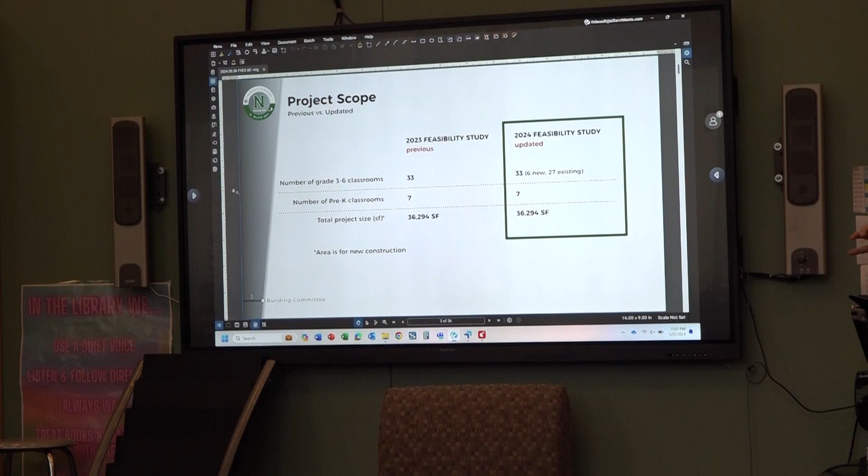So 33 total classrooms, 6 new, 27 existing, 7 pre-K classrooms, and try to get as close to 36,000 square feet as possible, however it worked out based upon the modular unit. We're stuck within that building block, so it's going to be somewhere in that range - not going to hit that number exactly, and you'll see what that ultimately ended up working out to be.

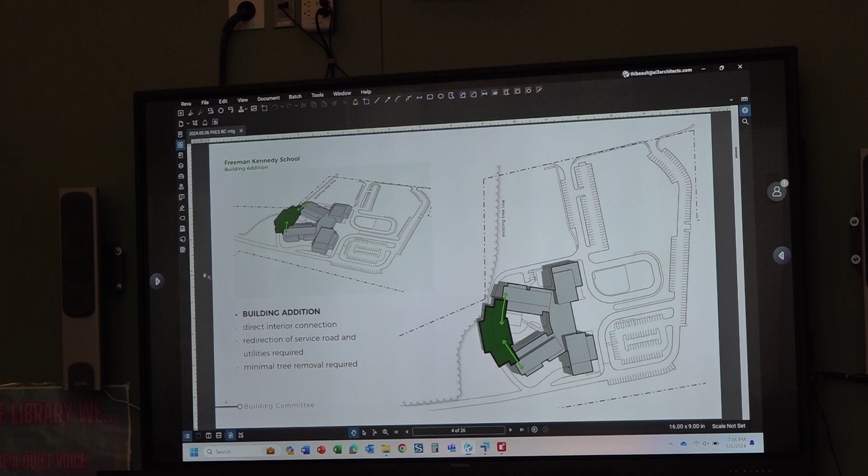So the study, the brick and mortar option - the previous feasibility study - looking in-depth at that conversation. Refresher: direct interior connection. This is an actual stick-built building connected physically to the wings right over there, basically bridging the gap, making the courtyard enclosed. Because it is a permanent build from foundations all the way up through, and the type of construction, it can be physically attached to this existing building.

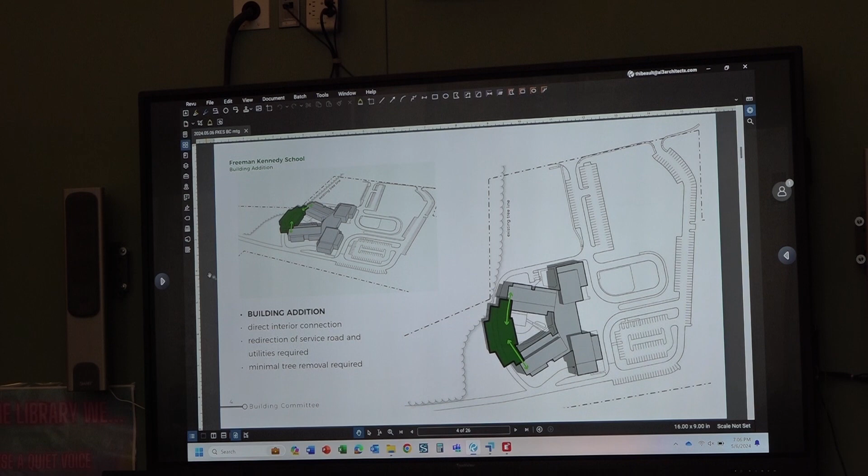It would require redirection of the service road and the utilities underneath that road. It's landing right on top of where that road is, and that was all captured in the study completed last year. And because it is within that service road and utility area, minimal tree removal is required since it's already cleared back there because of the road and the utilities.

So starting the conversation in fall of 2022, we piggybacked on top of the previous work that had been done back in 2019, as well as previously for the visioning and the programming, to really define what this project should be, needs to be.

So there were 4 specific visioning and information gathering sessions. It was to reconfirm a lot of the work that was previously done. The 4 sessions were broken out into early childhood (your pre-K component), art/technology/STEAM integration, general education and teacher planning, and then special education.

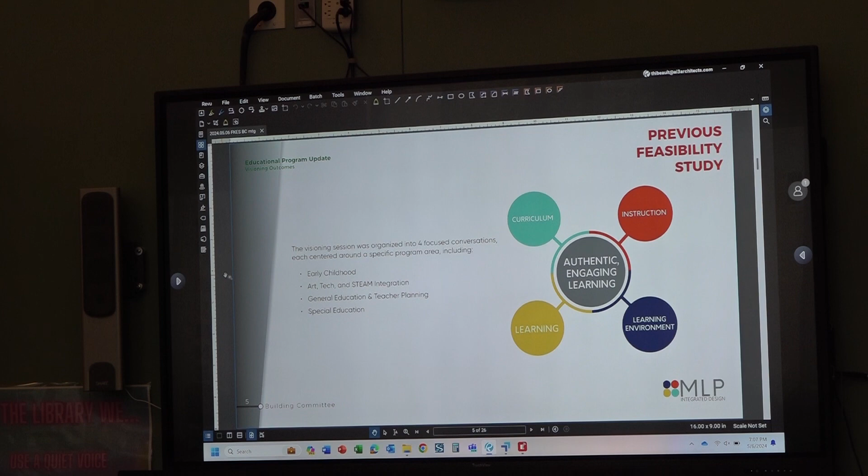We had in-depth conversations with the faculty and staff for each of these groups to talk about what was previously done, to see if it still fits the needs of the district, and the vision of the future. What was done in 2019 was a high-level overview, not thorough or in-depth. These conversations were a couple hours each, with tons of discussion and diagrams, and we came back with additional information.

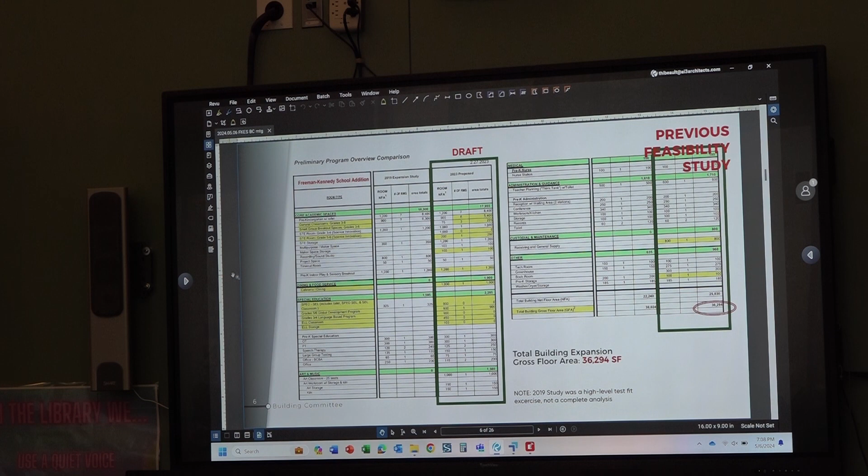Through this process and these focused conversations, we started to identify the scope and size of the project. What you see on the screen is a space summary, generated by the MSBA, the Massachusetts School Building Authority. Even though this project isn't utilizing MSBA funds, we as designers still use this tool because it's a spreadsheet inventory of all the spaces, listing the name, size, and quantity of each space. You plug it in, apply a grossing factor, and it calculates your total building size.

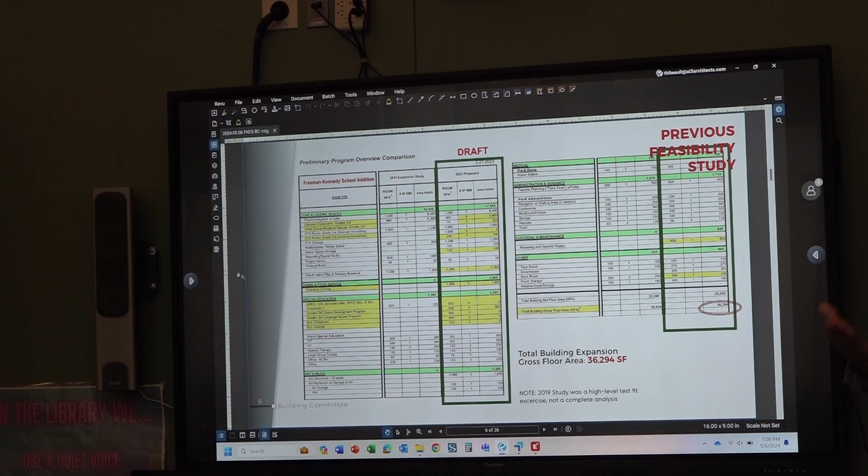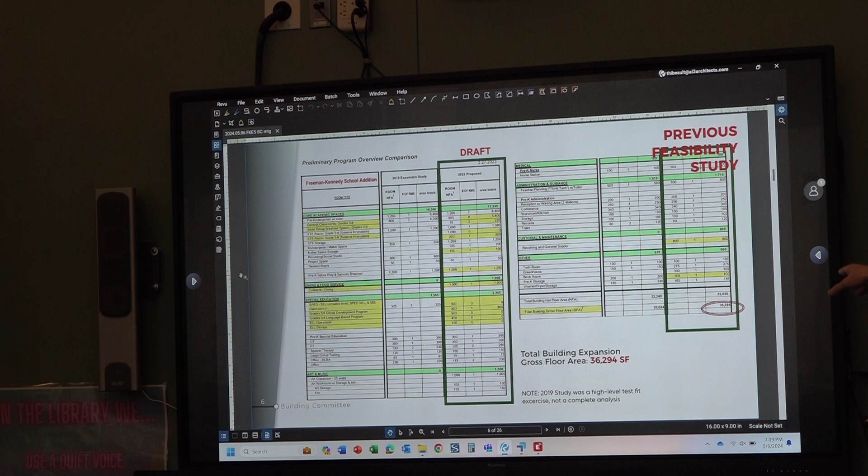What's on the screen and in the packet on the left is the 2019 expansion study. A space summary was done in 2019 to identify the approximately 30,000 square foot building project that was submitted to the MSBA multiple times. What's highlighted in green on the right is the updated version, with some modifications and revisions based on those focused visioning sessions. Ultimately, we landed on a project just over 36,000 square feet - that's where the 36,294 number came from.

Now, one thing to note is that this isn't the first round of the space summary. When we initially did this, we were at 41,000 or 42,000 square feet, significantly higher. Follow-up conversations with the district helped identify efficiencies and overcorrections, and really pin down the actual size needed, so it reduced down to approximately 36,000.

Justin, can I add some context for the group? When you're referencing 2019, we actually started with a joint space study committee with the town back in 2017. At that time, there was significant concern about all the Chapter 40B developments coming in and the pace at which the town was growing. That original space study committee looked at multiple options, including a Freeman expansion, since the building was designed with expansion in mind.

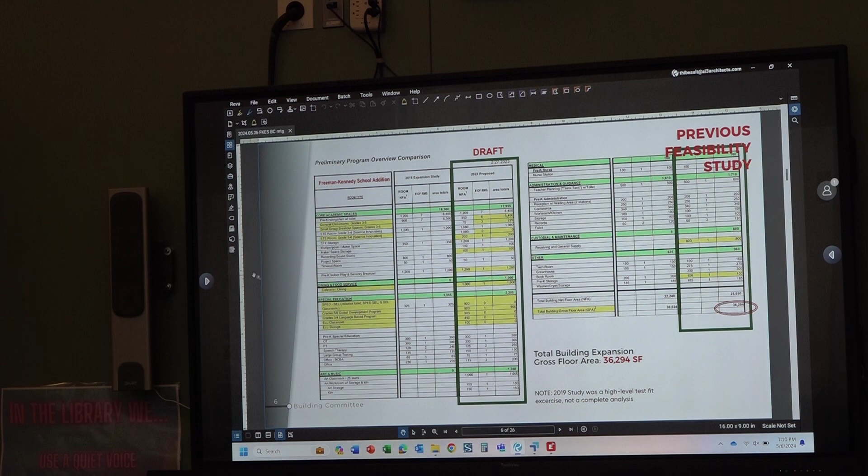We looked at the possibility of expanding at H. Olive Day and what that would entail, and then we looked at the possibility of a third site for an early childhood center. Based on all the data at the time, it was decided the expansion was probably the most cost effective. So we went to town meeting, I believe in the fall of 2019, and they funded a high-level conceptual study just to see if we could physically fit enough classrooms in that addition to make it a viable option for further study.

So when Justin talks about 2019, that was only a high-level look - square footage, system capacity. If you move the preschool, you need a nurse, OT, PT, so what spaces would you need and could we fit them? It wasn't the big study that AL3 did - it was only about $10,000 for that big picture design piece. Very good points of clarification, and along the way, please feel free to stop me and ask questions. We've been through this multiple times, but we can expand on any of it.

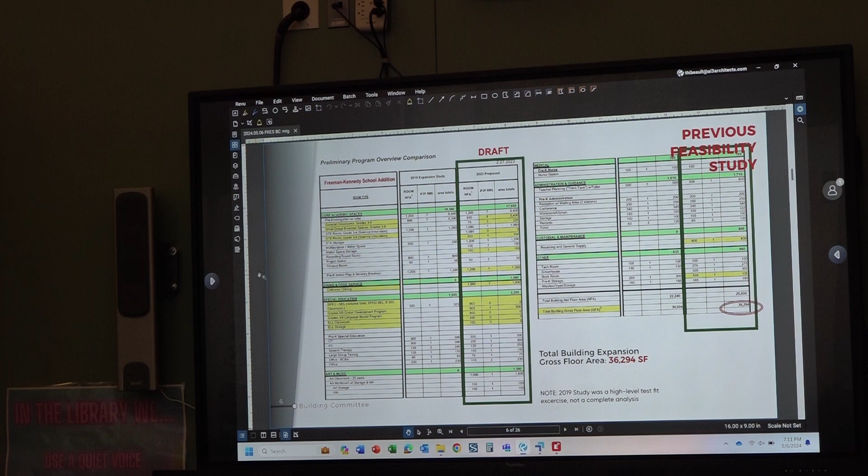I noticed the addition of 1,000 square feet for dining. Would that be a separate dining facility for this new addition, or would it involve moving the existing cafeteria? Yes, as part of the study with increased enrollment, we were asked to look at what happens when you bring in that many more kids - can the existing facility fit it?

Initially, we had targeted 1,000 square feet to accommodate that additional growth. Based on configurations and further analysis, it can actually be accomplished by just reconfiguring the number of tables and the layout within the space. So that's a component that could possibly drop off, because as currently configured, it's landlocked - it would be a significant undertaking to move the kitchen or district administration for what could be accomplished by additional tables and reconfiguring.

Makes sense. We did look at that though, because we're going from class sizes of 128 kids having lunch to 170 kids we have to seat. So ideally you'd make the cafeteria space bigger, but cost was prohibitive, so we looked at other ways to address it.

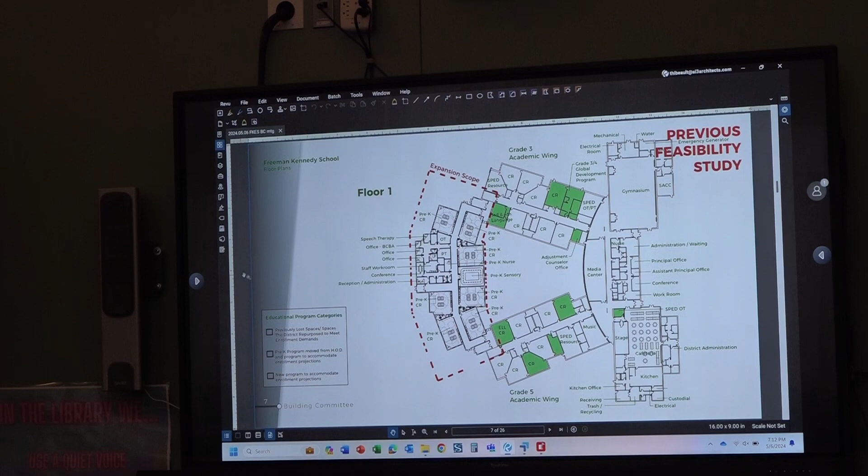So what does that 36,000 square feet actually include? What's up on the screen is a floor plan of the first floor. Before we hop into the actual expansion scope flagged on the left, I just wanted to mention the items in green on the right.

The green items are existing spaces within the current school that will be reallocated for who utilizes those. So minimal work, maybe a little ceiling work, floor repair, paint, but nothing like a holistic project. It's minor renovation, just to reconfigure based upon the new occupants or program of that type. Some of that's, for example, the science lab that we've now made a classroom. Ideally, we turn that into a permanent classroom and move the science lab to a different area.

Those are just opportunities we have to reorganize so that it's better efficient and better flow. This was looking at more of a holistic approach based upon student needs, student services, really locating support spaces central within the building. We're not locating a space that is utilized by the entire student population at the end of a third grade wing, or whatever it may be. So it's actually really apparent on the second floor.

You'll see when I flip up there. But this was an allocation and almost a global study of where can spaces be located with minimal renovation, reconfiguration to make it work best now that there is some capacity issues addressed with that expansion project. So that's what the green is.

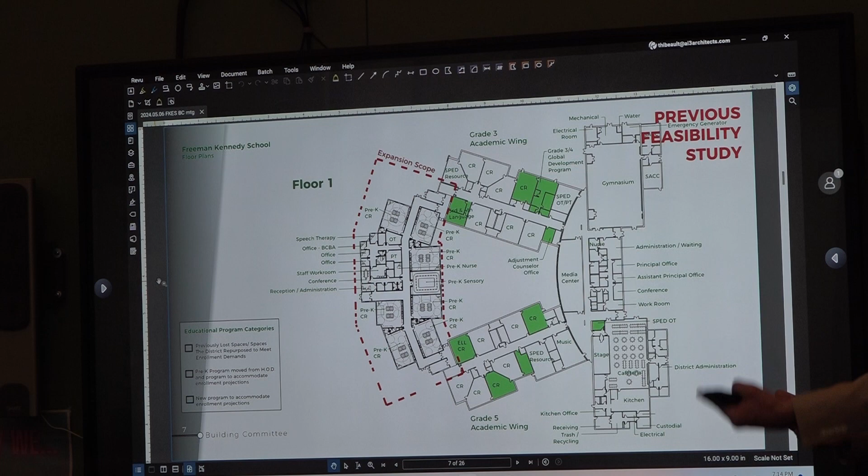Within the expansion scope, first floor is the pre-K component. So it's all of the pre-K classrooms, the pre-K sensory space, the associated toilets with all the pre-K rooms. It's also the special education administration component. As mentioned, the special education is going to move over from HOD to here and really be the front office, as you will, for the pre-K component. So that includes that entire staff, OT, PT, and the pre-K nurse. All of that program is located right here.

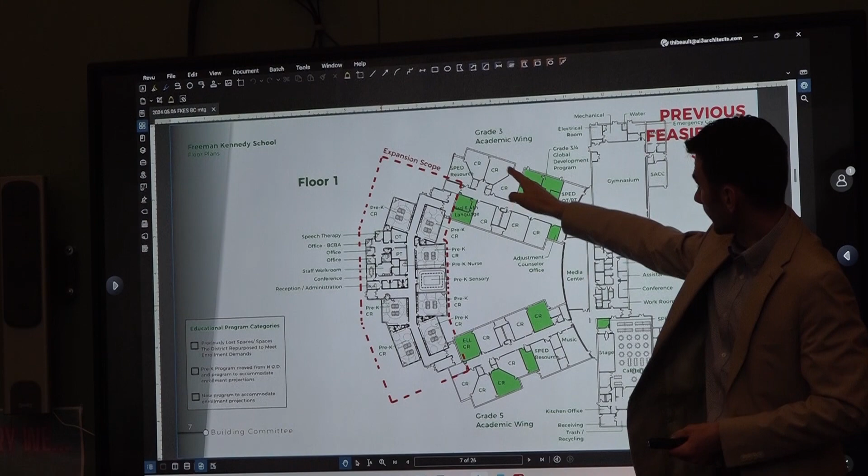That is the main entry to the pre-K component. Directly adjacent, and then around it are the classrooms and the sensory space. Connection to the 3-4 wing, the 5-6 wing down here, adjacent to the stair towers, the existing stair towers with doors that can close off and lock, still allow access internally, but that would be controlled with key cards, etc. Always allowing free access from a code perspective in an emergency, but still separating the youngest students with the 3 through 5 or 3 through 6.

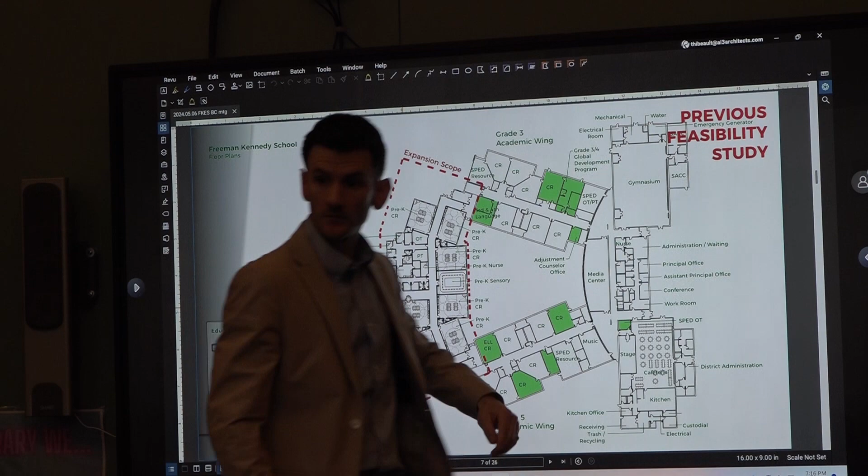Sorry if I missed it, so the main entry for that would be in the back there? Main entry is right here to the pre-K component. We designed that too so that the preschool traffic won't interfere with the bus flow traffic from the rest of the building. There's a separate entranceway and a separate road that comes and exits out the back of the building.

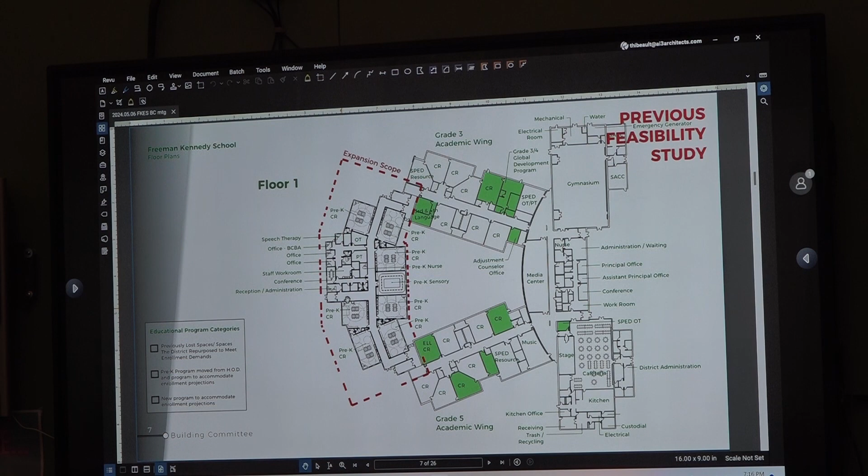That proposal will replace the existing access road back there? Yeah, you have to move the access road over. Shifted? Just shifting it over a little bit so that it's not over the electric, back towards the woods. You'll see on the site plan, it adds actually 43 parking spots back there with a little bit of a drop-off loop dedicated to the pre-K component. That way, they're on that side of the site in totality. Arrival, dismissal, all of that stuff, preschool play, everything is over there. Their main entrance is over there. They don't need to use the front of the building over here.

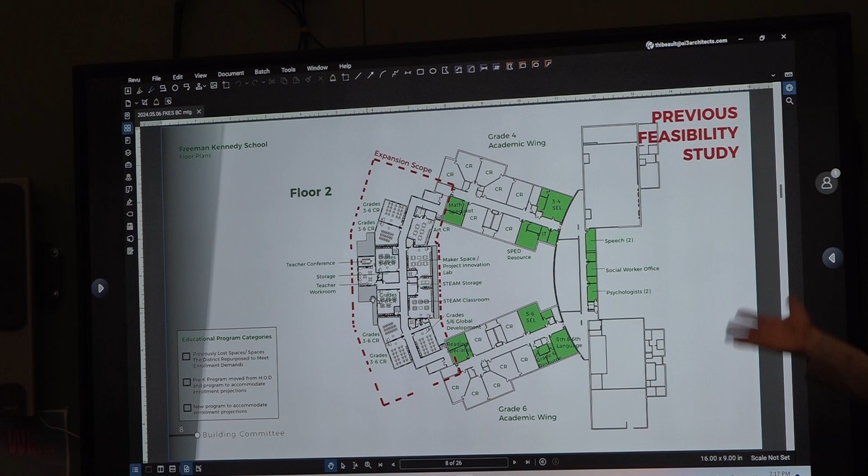As far as the expansion scope, this is where your 3 through 6 components live. So your classrooms for grades 3 through 6, I'm just going to sit on this side. Classrooms are over here. This is also where the teacher workroom and conference area is right now. It's actually the speech office, which is vastly undersized. It's tiny.

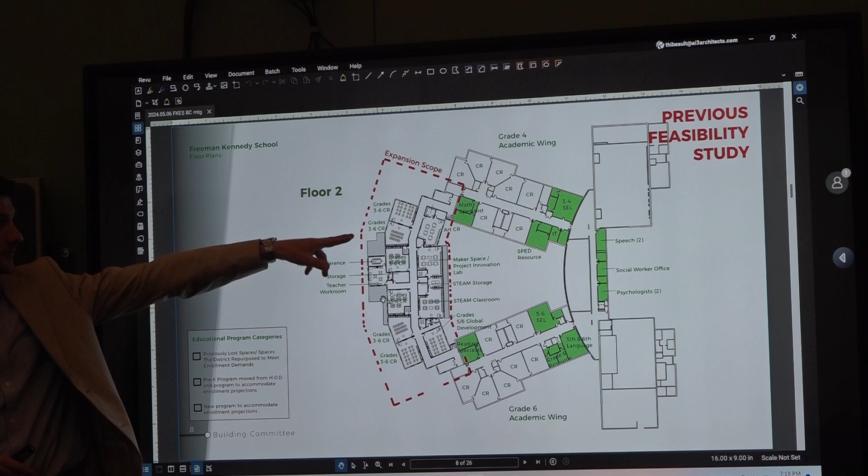So locating the conference room over here, as well as the STEAM classroom, which is that science lab that's essentially going to be replicated over the expansion. The art classroom—the current art classroom is inadequate in ventilation for the kiln, as well as location. It's within the 3-4 wings, so by locating it in the center zone here, it brings it more central. It also creates a nice connection between the STEAM classroom, the art classroom, and the makerspace within that as a tech center.

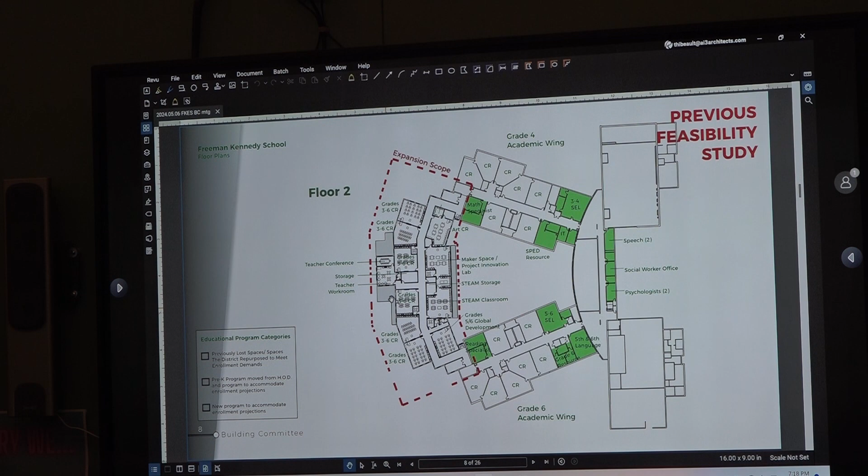It's a room where, if teachers have classes at specials and they have prep work to do, it's where the copiers are and all of the teacher planning materials. Right now we have the teacher planning room in the speech office, so we'd be moving the speech people there and moving the teacher prep room to the wing—think laminators, copiers, printers, all of the materials they use. At the school I went to, I guess obviously bigger, it was all just in the administrative office. Yeah, we don't—we have the teacher prep room, which is where they do all of the materials preparation for the day during specials.

And then the conference room is just like a boardroom type room? It's a prep room, it's one space. They can use it for prep, or if they have a teacher meeting, parent meetings, or small group meetings within that one space, one office space. So it's a multi-purpose room, really. Okay.

Yeah, so that makes up the second floor. That is the 36,000 square feet. That 36,000 also includes grossing factors—things like your stairs, your hallways, your toilets, the wall thickness, all of the stuff that is required just to make the building physical. So, 36,000 square feet from a 30,000-foot overview.

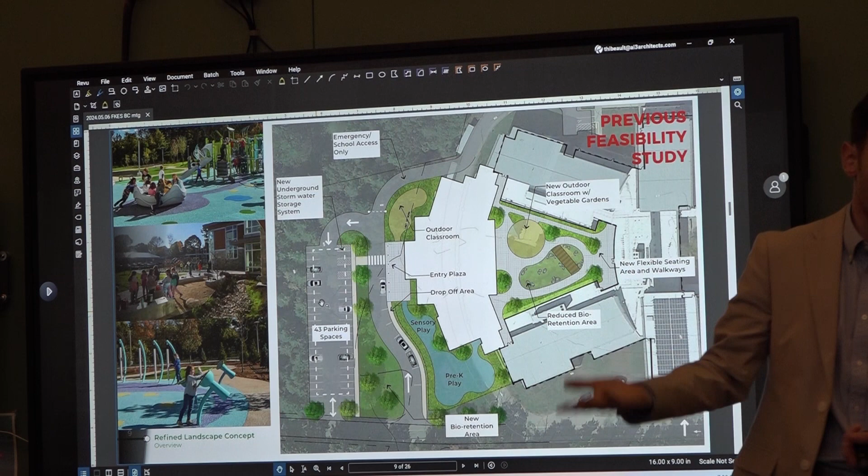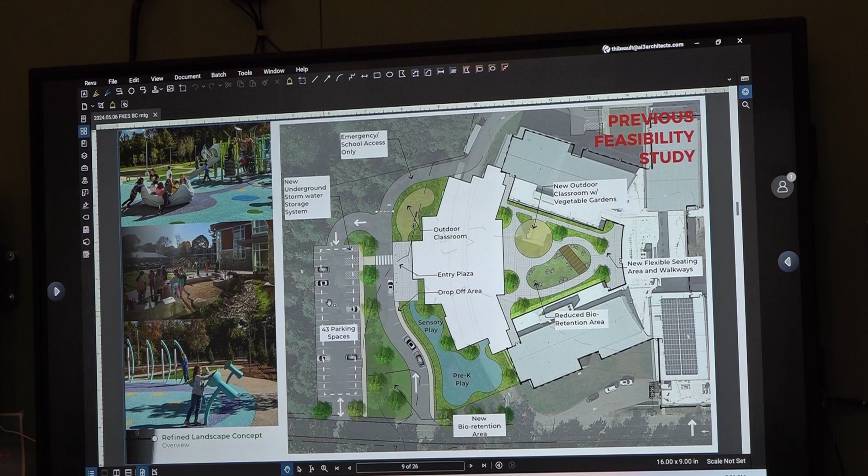It does enclose the courtyard, but there are provisions for safe egress in the event of emergency, and there would be some reconfiguring within the courtyard to provide an outdoor classroom configuration, as well as to modify the current stormwater system. There's stormwater retention within the current courtyard, and also a lot of retention system underground where the building would be. So that is part of the project—to redo that for all the bio-retention areas you can see down here. There'd be one proposed over here to replicate what is lost by the new footprint of the building.

So that is the building itself. Before hopping into the projected cost of this version—we'll go high level because it's approximately a year old—is there any questions on what was being included?

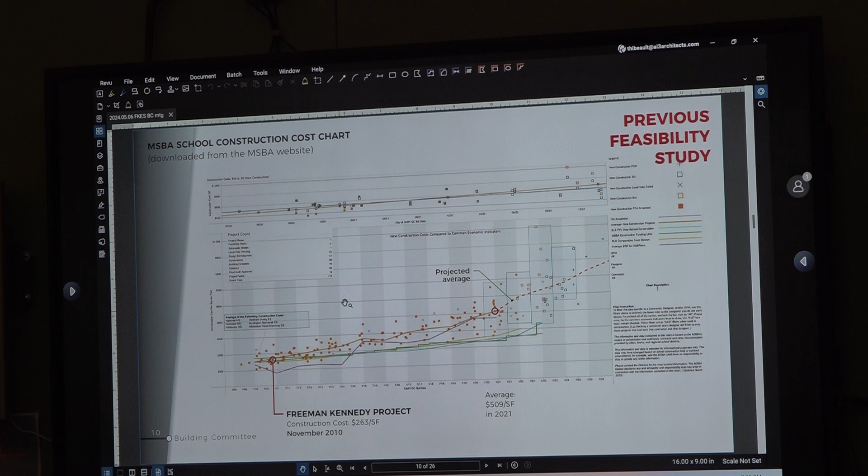I think just to reemphasize, the square footage space adds 6 classrooms for Freeman, and it adds 7 preschool classrooms plus the office space. What you see, that science area—that's moving the art room over, moving the science room over, which gives us additional classrooms in the wing. So the total adds the 6 classrooms for Freeman, 7 preschool, plus the repurposed science and art room.

And that frees up space at Olive Day—well, we need more than preschool. It gives us back some other classrooms located in the wing by moving the art room, so really you're adding 8 classrooms because the art and the STEAM room are in the wing, but we're reclaiming that space. So it adds a net number of classrooms here, re-adds spaces that were previously used up, and frees up at the sister school, for the preschool program. Yes, right.

It moves, it empties out 5 core classrooms that are preschool classrooms, plus the special education office and multiple offices. So that's how this was originally designed as a solution that increased capacity of both buildings. The space allows us to reclaim a lot of space that was previously added and lost, without having to build another gym or add to the cafeteria. That was the whole thing, it just made more sense at this school versus a whole rework at H.

Part of this is just reiterating for the folks at home. We did look at adding, as I said, back in 2017, and we looked at it again with Flansburgh, who did the 2019 study, as well as AI3 - the idea of adding to H. Olive Day. The problem with doing an addition at H. Olive Day is the building's 35 years old. It was significantly more expensive to bring the building up to code if we added onto it there, and the life expectancy of an average school is 50 years, so we'd be investing a lot in renovation, plus it's built to the footprint of the land.

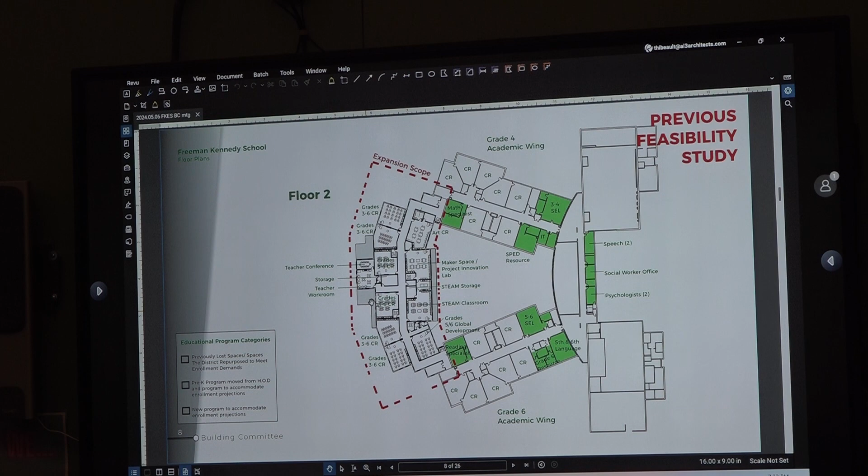If we're reiterating things for the people watching this at home - I've had folks ask me, there's all that space behind H. Olive Day, why can't you go back? That's conservation land, so it is statutorily prohibited. Versus here, the original footprint allows for this development.

So looking at it from a cost perspective, what's up on the screen is a graph from the MSBA. We know it's not an MSBA project, but the MSBA does a very good job tracking construction costs in the K-12 market - that's all they do, that's all they fund. They watch that constantly through multiple phases of the project, and they have historical data all the way back to '03, '04, back when they started the program. This data is also a year old, so keep that in mind as we go through it, but all the data up to here is still accurate.

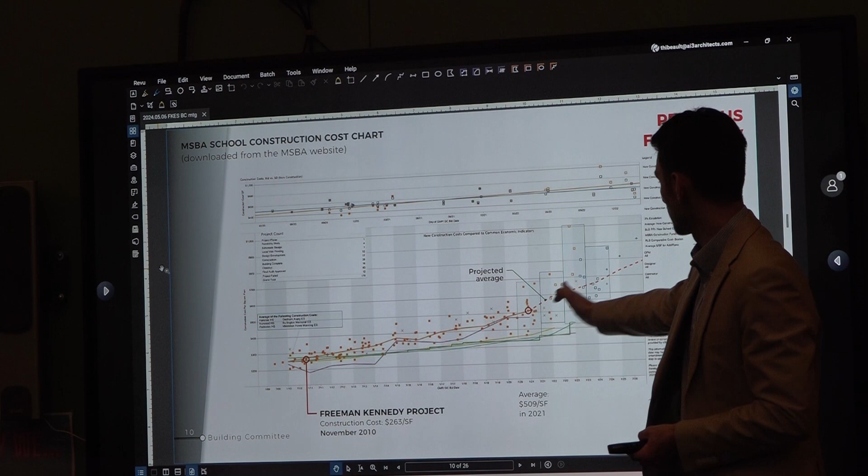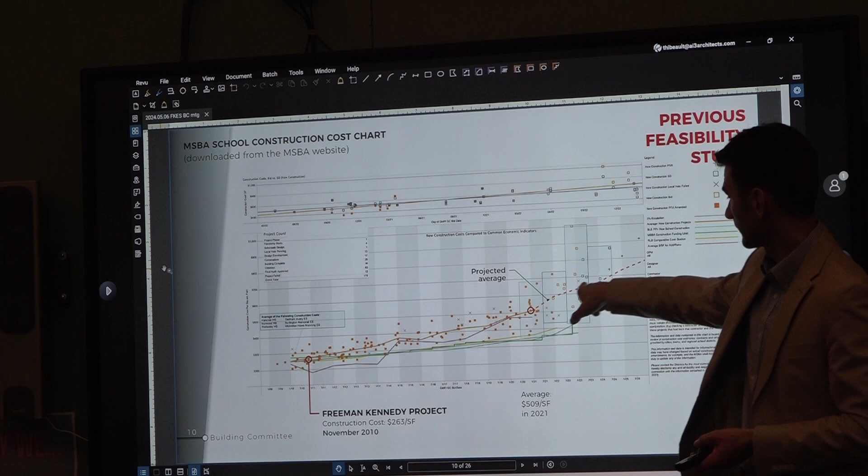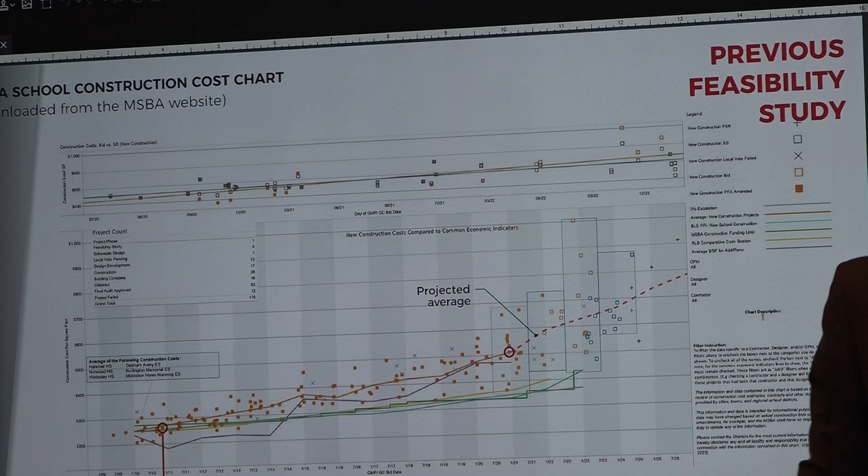So the Freeman Kennedy project back in 2010 - just to give everybody a sense of scale of where you were 14 years ago - construction cost average for Freeman Kennedy was $263 a square foot. I know it's hard to believe that's what it was in 2010. Moving forward, the MSBA identifies the average cost - the dashed orange line is what we're projecting the average is, because those projects aren't in closeout yet. So in 2021, the average construction cost is $509 a square foot. Over 10 years, it basically doubles.

We're going to come back to this shortly to see where the project fits in, but that's really setting the table, and you can see the boxes are all trending up.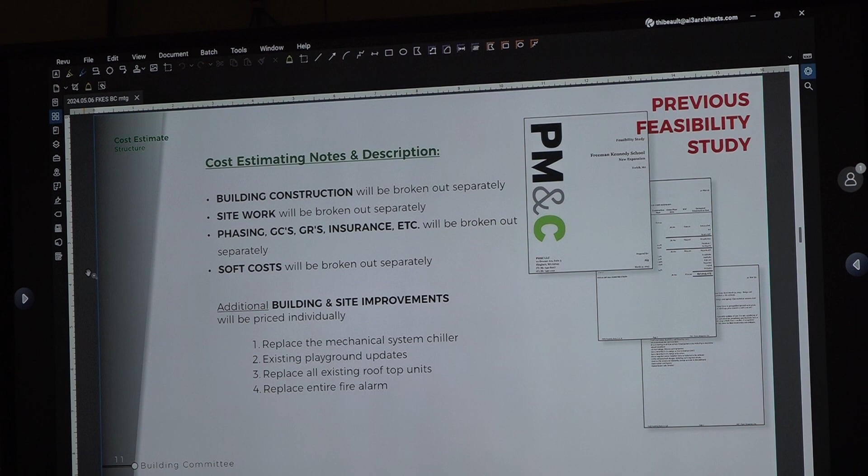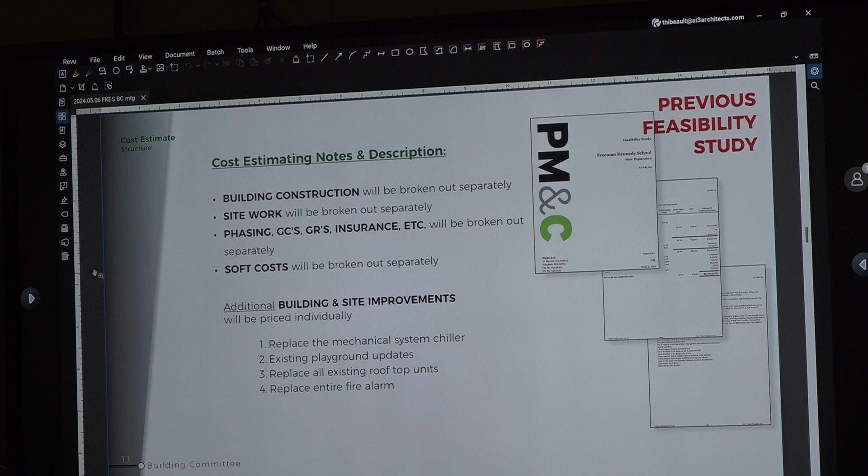During the feasibility study last year, we had a professional cost estimator, very familiar with the K-12 market and public bid, go through and provide a cost estimate based upon the floor plans, the site plan, and the narratives for the project you just saw. It's broken down into a handful of elements: the building construction as a separate line item for cost, site work so you can identify how expensive the site is, phasing, general conditions, general requirements, insurance, etc. - these are the bucket of monies required just to build the project, plus everybody's fees.

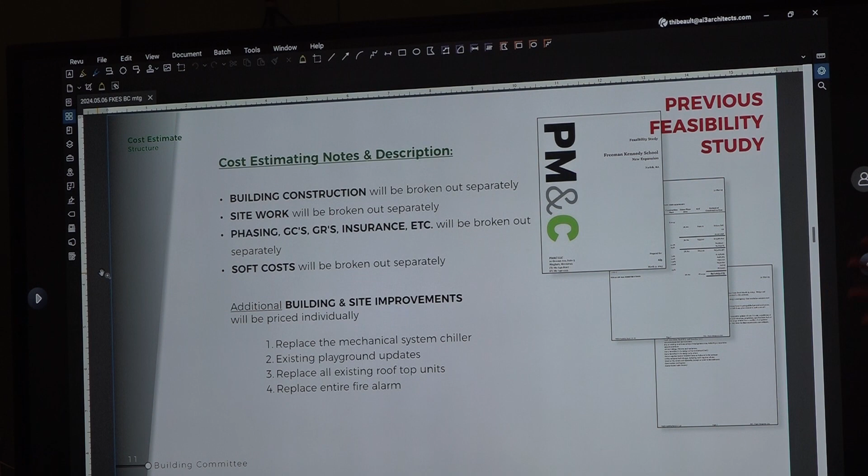Additionally there are soft costs - that's technology, that's FF&E, that's engineering fees from the architectural and entire design team, that's OPM fees. Your project is big enough that you will need an OPM as it progresses. All these items are broken out as a line item just to give everybody a sense of where everything is landing. Additionally, there were 4 items identified for building and site improvements.

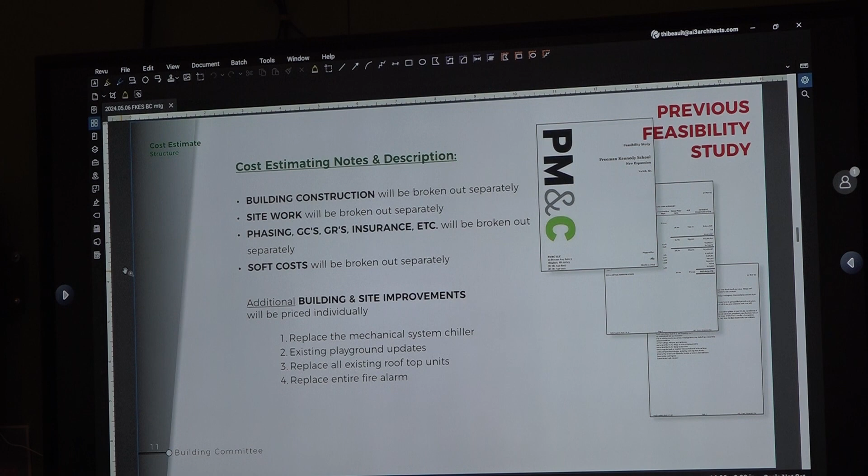That's based upon your existing building and current configuration - if you're going to go to the town for money, make it worth it, instead of going back and borrowing again if additional capital repairs are needed for this building. So number 1 is replacing the mechanical system chiller, located over the gymnasium - there have been comments and concerns with it previously. Number 2...

It's at the end of life expectancy too. Yes, it will need to be replaced, coming up on 15 years.

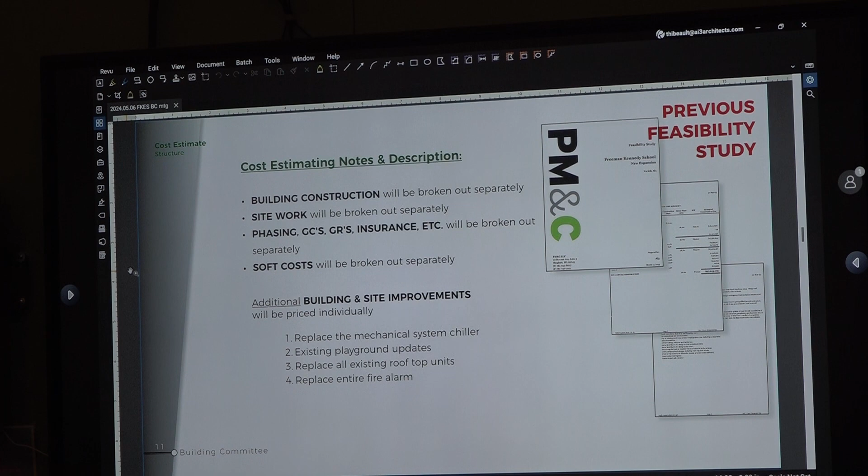Exactly. Number 2, existing playground update. So that is repouring the soft poured-in-place surface, fixing the fencing, fixing some accessibility items as well, updates to the playground.

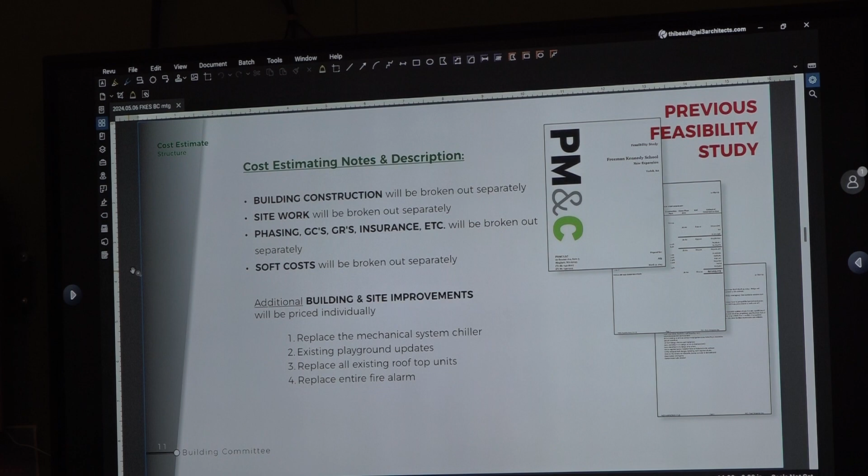Number 3, replace all the existing rooftop units. If you're doing the chiller, the rest are all at their end of useful life. You're going to start replacing units here and there. What is it going to cost? Again, this is to provide a cost for doing all the units on the roof in one shot.

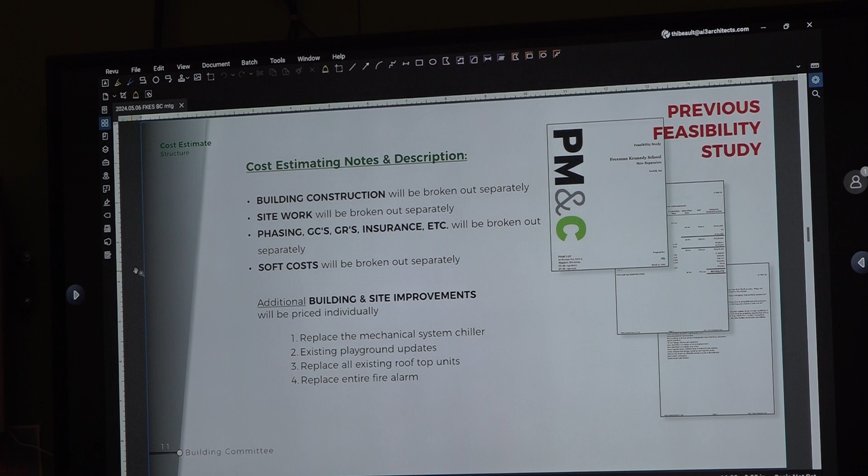And number 4 is replace the entire fire alarm system, within the existing building, to update it and align it with whatever is provided in the new expansion project. Is that at end of life too, or just? It's not at end of life, but I believe it's a proprietary system, so it's very expensive to service and get parts, and you're locked into a specific vendor.

So it would be replaced with a more open source type system? Yes. We've had a lot of trouble getting people out to fix or repair or getting parts, because it's proprietary, so only one vendor is able to work on it. Matt can speak more to this, I know more than I should, but not as much as Matt would. Matt's predecessor had the same position, I believe, about the fire system.

Plus, if we're adding on, it makes sense to have the two systems aligned together. I'm just more concerned that the previous system sounds like it was a bit of a dud. Does it work if there's a fire? Yeah, it works, but sometimes it works even if there's not a fire.

We had a smoke alarm giving us trouble the other day, and the tech came out, looked at it, and called me and said, look, they're going to tell you we don't make these heads anymore, so you'll have to replace all the heads in this building. He said, you're better off going on eBay or looking somewhere else to find these heads. So we ended up doing that, but most of those detector heads are $400 to $600 a piece. That sounds suboptimal.

Again, it's a proprietary system, so you're stuck paying it. So one question: between the two projects, if we go either stick-built or modular, are these items still going to be addressed? In other words, were these four items optional? The town could decide to just do the project and handle these as later capital items. If you do modular, or a different solution, these are still end of life. They'll have to be done, whether the town votes to do them as individual capital items later, but they're all end of life.

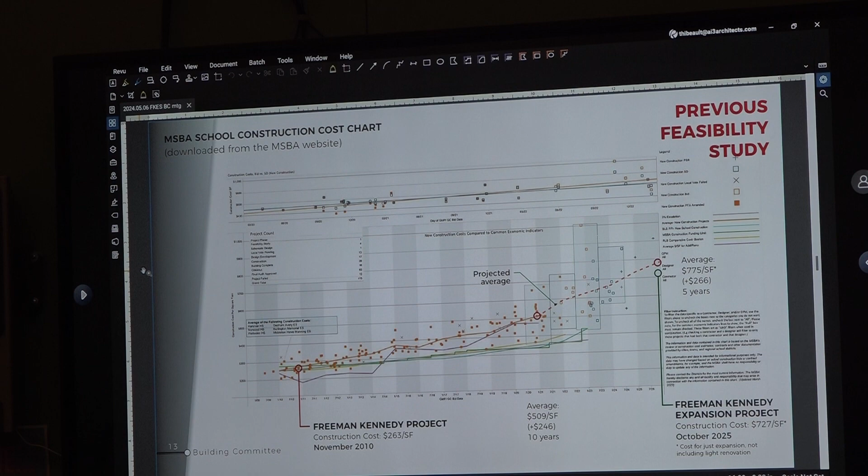So again, still lower than the projected average, and it'll be interesting, since this was a year ago, to see. We're going to send these out to get re-estimated and see where that 39.2 lands, and we'll report that alongside a comparison to the actual mod study, apples to apples, because that number will go up, absolutely. It's just a matter of how much, and where it lands in comparison.

And then the last one was the project timeline. If it moved forward previously, it was going to be town meeting, town election, 2023-2024, fall, November, December, January of 2023-24.

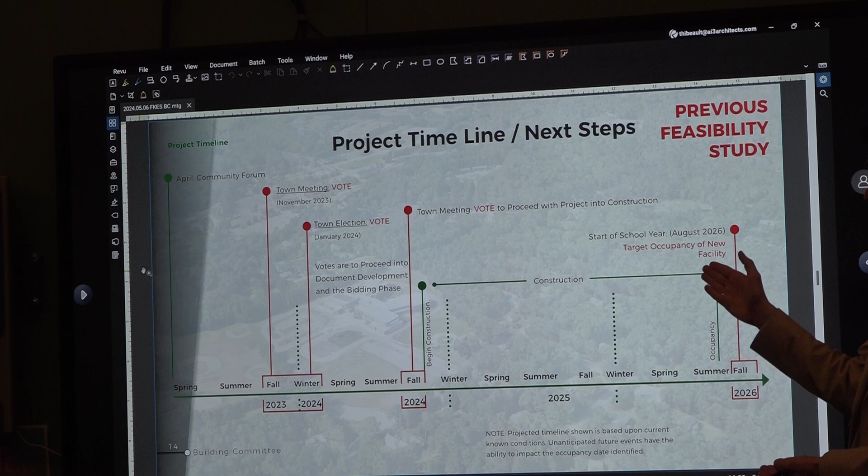Then it was going to go through documentation for approximately a year and bidding. It was targeted to go back to town meeting in fall of 2024 with bids in hand, saying this is the actual cost of the project, here are the bids for the actual work, and then proceed to the vote and begin construction.

A 2-year construction window, so occupancy would target fall of 2026 — September 1st, whatever that first day of school is. But again, this is a year old, and all of this is going to shift at least one year based on timelines. So occupancy would be fall of 2027 as we stand right now, if everything moves as originally laid out.

So that's the overview of the previous work. I'm going to pause there to see if there are any additional thoughts.

The full feasibility study, if anybody wants it, is online on our webpage. It's 150 pages or so, and it has the traffic studies, all the septic engineering, and all the rest of that.

So I printed these large because what we're going to go through next are the layouts of the mods, and the print is small, so I figured it would make it a little easier.

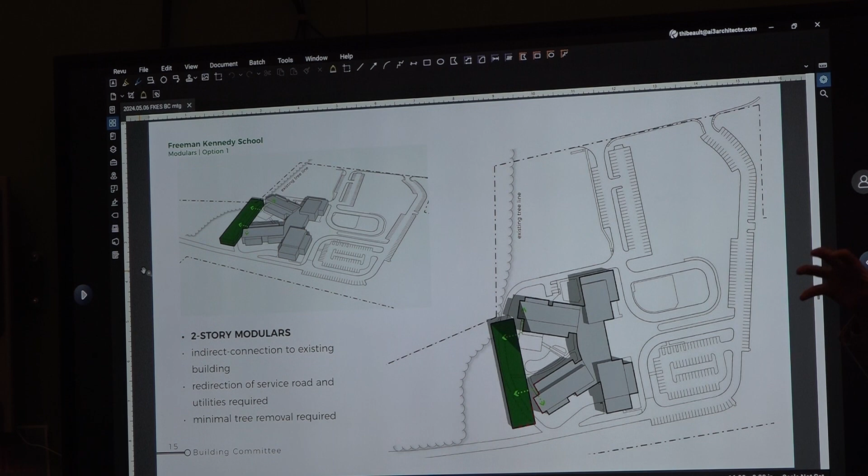So, option 1, 2, and 3. Option 1 is what we'll call the apples-to-apples option — same location, just a little bit of separation, but on the existing access road, over the existing utilities, and close to the building, though indirectly connected since we can't physically connect. This involves redirection of the service road and utilities, with minimal tree removal, basically the same spot as the previous version, minimizing disturbance of the trees.

This is the most efficient footprint for the mods — a single straight line. The modular unit is 14 by 66 or 14 by 39, and based on those dimensions, that's where everything goes up.

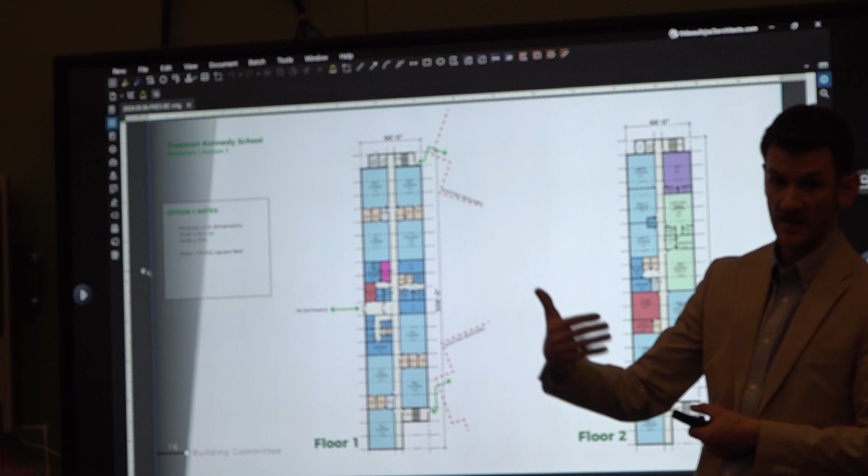Some of the high-level components remain the same configuration: first floor on the left, second floor on the right. The first floor has all your pre-K classrooms, the pre-K sensory space, the special education administration suite, OT, PT, and the pre-K nurse. It's all the same programmatic elements, just straightened out into a narrow bar because of the modular configuration. Again, every classroom in pre-K will still have a dedicated toilet, but you can see the efficiency and where everything lands.

Same concept — the pre-K entrance is still centrally located towards the back, so the site plan configuration is very similar to what we have. The connection points would be one at each end from the actual Freeman Kennedy side, with students going outside, accessing the stair towers on the end, and then circulating up to the appropriate classrooms.

Second floor is the elementary. Can I just ask, are those stairs interior, enclosed? Yes, interior stairs — so the path of travel would be flat on the sidewalk, straight.

Second floor, same configuration — all the classrooms, the teacher planning space, the steam room, the art room, the maker space. It's all the same programmatic elements, just straightened out and separated from the building.

Looking at this, as I mentioned, there are limitations based upon modular sizes. How close to that 36,294 square feet can you get? Right now, this configuration is 35,642, so it's about 500 square feet off. It's pretty close, comparable based upon the amenities. Spaces are slightly above and below, but they're pretty close.

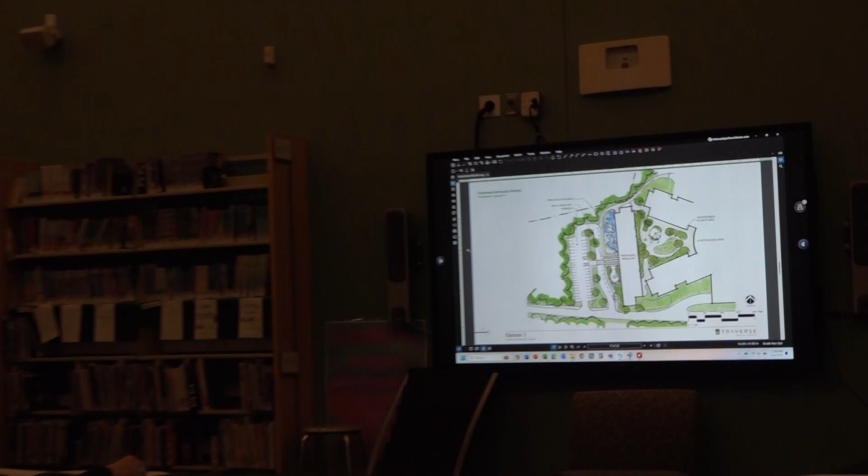Now, if we went with a modular solution that is not connected, we may have to rethink - do we move the art room? Because now everybody in the building has to go to the modulars. We might have to, but we need the same number of spaces, so for estimating purposes it's probably fine. But we might have to rethink whether we want the science room that everybody accesses to be in the modulars - we'd have to really rethink that a little bit.

No, we'd have to reorganize what actually lands. But I think when we went through the process before, we had talked about having project spaces and extra rooms. We cut everything out, we only put in the classrooms. So we need all of these spaces - what actually lands, we might have to play around with.

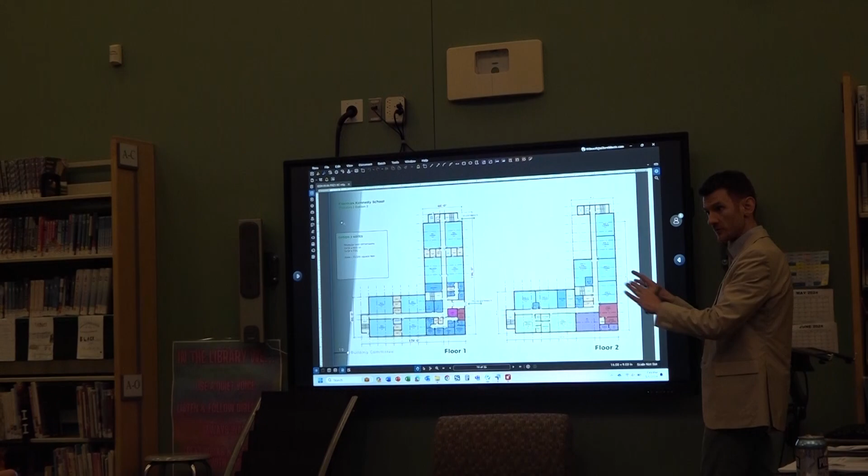Site plan of option 1 talked about. So option 2, this is the 2-story mods, and this is actually taking them and pushing them further back towards the woods, again trying to avoid that perimeter access road and all the underground utilities that are right where the previous options were planned. So looking at this configuration, we're tucking it into the woods. You'll see on the site plan here in a moment, but it's really in an L configuration. Again, first floor is pre-K, second floor is the elementary school. All of those same components and rooms are separated, first floor, second floor, same configuration.

What we've done is that central control point - special education, OT/PT needs, etc. - is in the knuckle, from a visibility and control standpoint, and then we have two wings off that. And then up to the second floor, that knuckle is teacher planning and some support spaces, and classrooms stem off of that in each direction. The stairs are located at each end, as well as one in the center for easy access up and down, but also to provide the code required stairs for this space because it is long.

And then this obviously requires the kids to cross that access road. Yep, right? Absolutely. Yeah, so this one is 35,509 square feet approximately. So it's what, 700 less?

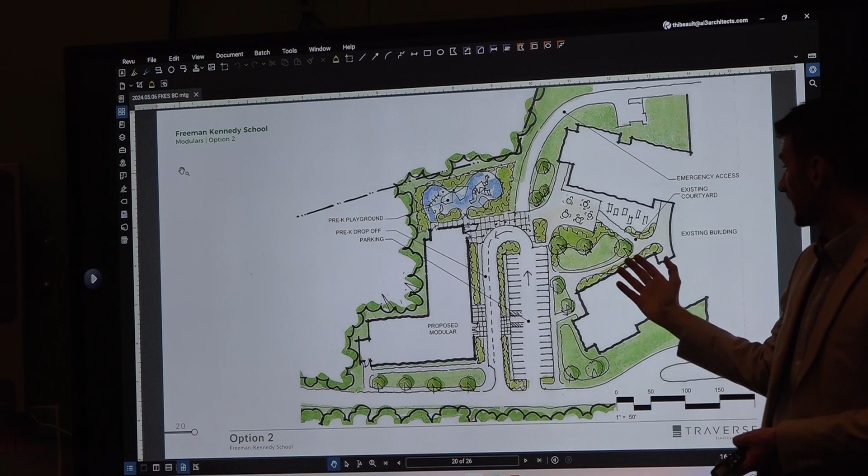And this is what the site plan would be. Again, we took that same drive loop and parking, and that is now where the access road currently is. The building is further back. We're maintaining the perimeter here, but more for emergency access, so that can be gated off just to avoid having parents drive through the parking, because in reality, this hardscape plaza is where the elementary students are going to be, what they're going to be using to circulate to the modular units. And we don't want them crossing this component here, so that's what that's for - we would block off this road so there's no through traffic.

And again, same configuration of parking, it would drop off to the pre-K component. Playground is located at the northern side, and then there would be some work within the courtyard. So a lot of similar configuration, or same amenities, just different configuration based upon where the footprint is located.

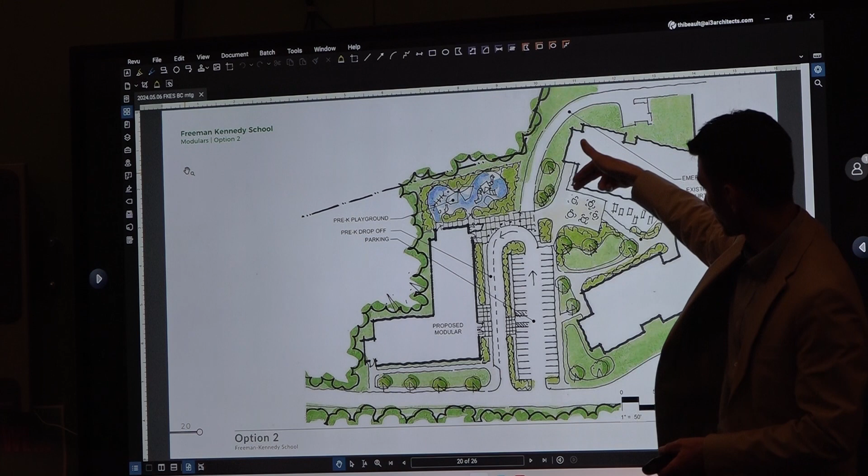So that crossed off area would be walkway where people would access from the building wings, over into the modular. Exactly. And that would not be a covered walkway because of the distance - that would just be outside, back and forth to lunch, library, gym. Yep, that would be the back and forth for students and staff, the older kids.

We touched on this a little bit, and maybe it's a question for after the third one's presented, but have we quantified what the loss is of class time, the additional or reduction needed in staff? Are we gaining any efficiencies by having one plan over the other? Because to go from A to B in the first plan versus A to B in the third plan, there's a difference there. We did not quantify that and couldn't even begin to, but you're probably correct, the first one would be closer. I think what we need to do is look at all three and get pricing, and if this is way off the charts, then it's not worth spending the time on that.

When we budget within the school day 5 minutes of transition time, a class going to gym and back will add to that, and they do go to lunch and one special daily, so it will decrease the amount of learning time. As we talked about last time, for special education, math, reading, or other kinds of services, kids will be traveling further. But before we get into the details and look at the traffic flow, we want to figure out if these are viable or cost efficient.

Then we'll have to take the next step for this committee to weigh the pros and cons of each option. And just to piggyback on that, as an FYI, the length of the school day is dictated by the teacher's contract, so we can't just say we'll add 5 minutes every school day and have that be a thing.

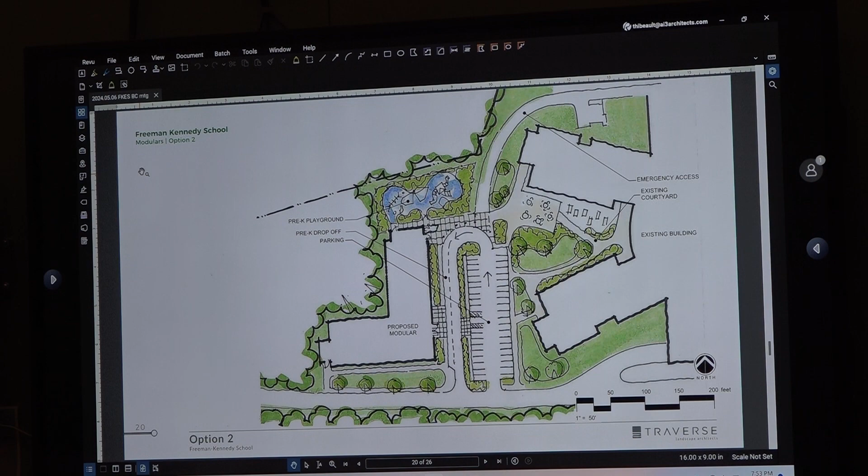I would think if this is the one that's closer or similar in price, this would be the best solution.

Option 3 is the single-story modular. This is located on the field area right out front here. It's the largest footprint because it's taking that same area and just putting it on one level. Far access, as you can see. We would have to look at utility connections further if this was a viable option, because it's outboard of where a lot of the utilities currently service the building.

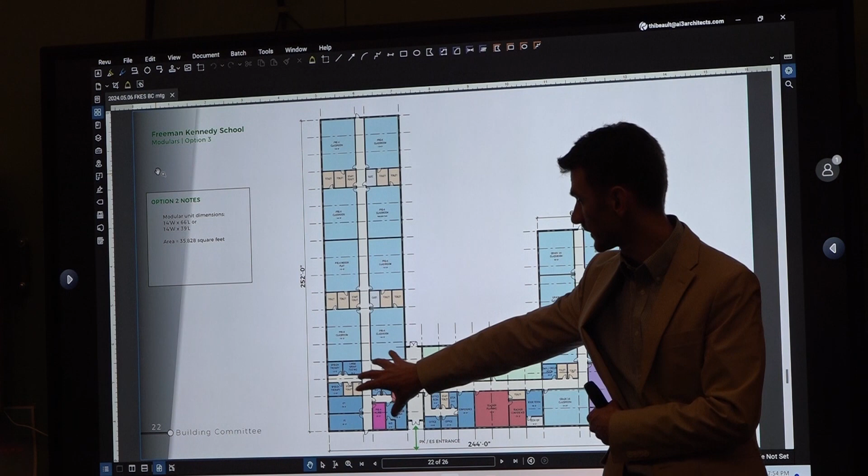From a floor plan perspective, it's similar-ish to the previous L version. What we've done is located the control—special education, nurse, etc.—in this knuckle. The pre-K component runs vertical on the left, and this becomes your elementary school component here. Classrooms are over on the end, and what we currently have are more of the support spaces, teacher training, etc., in the middle, again for more control within the building.

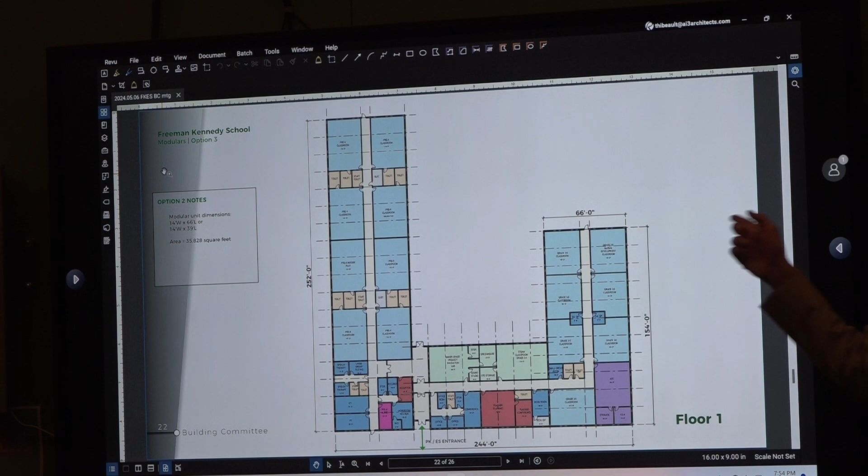It also locates the entrance as close as we can towards the existing gymnasium corner. From a site plan perspective, we're keeping a lot of the same configuration here. Existing parking remains here and here. We're adding in a drive aisle here for drop-off, and this would become your pickup and drop-off for pre-K. We do have some questions regarding timing because this is also near the bus loop and how that all works.

Based on our traffic analysis and study, we could capture the 43 identified spots for that pre-K component in your existing parking. It was identified during traffic counts that over here on the left is always full. This large bank of parking right here is approximately 50% full during the day, and all the way on the right, that whole loop, even down to here, is only 10% utilized throughout the regular day. So there absolutely is efficiency that could be gained with it being up there, just from a parking perspective. Granted, there are other cons—it's a large footprint, it uses green space, etc.—but from the parking standpoint, there is that little bit of offset.

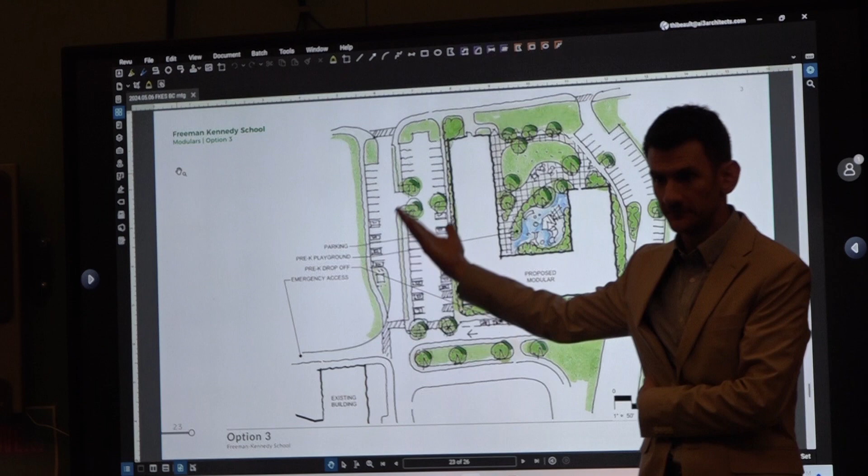Just as a reference, if we locate this here, this takes away the play field that's used for recesses currently. And so the students that have to transition between the buildings would be coming out and walking up this new access road and then coming up that way, hitting the corner of the building. So out by the gym, and then staff coming in doors, and then just up to the field.

One of the issues is where do you access the existing building? You don't want to come into the gym, so it could be like that after-school area, but then you're still going through the gym, or you come all the way down across the front of the gym and in that other main entrance on this side of it. So there are some concerns, or thoughts that need to take place, about what door they actually use, which could possibly extend the travel distance.

So getting to the point of the recess area, would there have to be an additional space created to replace that? I don't know where we would create another one—I think we would lose the field. The kids during the day, the rec fields we sometimes use, it's a longer walk, and whether we could work out something—I know they're not going to want us on the softball fields they just redid, but could we use some of those field areas?

It's a challenge because they're further away, and recess is only 15 minutes. If you spend 5 minutes walking out to the field, you lose time. Most likely we would, and they don't use it a lot when it's heavy snow, but it would limit play options if we located it there.

That's the play area on your way out to the softball fields, the smaller one. Yes, if you're right in front of the building, there's that big field behind the parking area, and the kids do use that. Some kids go play in the playground, and other people go to the Gaga pit, and then past that. Whatever it's called, the Gaga pit, and the pit thing. Yep, the Gaga pit.

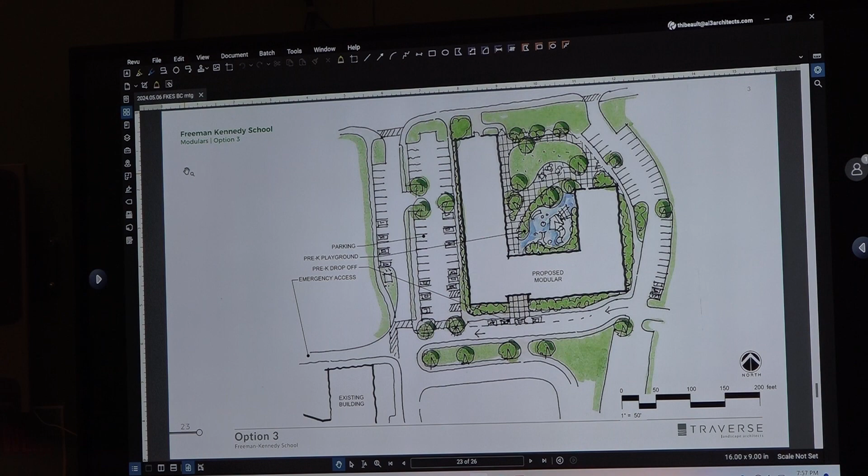So you chose these 3 locations because of the amount of square footage we need, the size of the building, and based on all of the available land on the Freeman Kennedy site. Right, those were the only 3 options that would accommodate it. Yes, those are the 3 options, because if we located it on the parking lot, well, one of them is your leach field for your septic, so we don't want to put it there. If you want to locate it on the other ones, we could work to fit it in, but then you have to replicate that elsewhere. So our take was, don't disturb what you have that you will ultimately need, if possible, and locate the modulars where it makes sense, trying to avoid some of those items.

That's why it's apples to apples. That's why it's pushing it back, to avoid some of those known conditions with your utilities and your stormwater, and that's why it's the field up front.

I think the big thing, as Vicki mentioned, is in all 3 of these designs, it gives you the square footage we need and the number of classrooms. We would need to really rethink educational programming, and I don't see us locating the makerspace, the art room, and teacher planning in the modular, just because it wouldn't make any sense. We would have to pick a grade level, like grade 6, move other classrooms and other spaces and reorganize, like we did in the last feasibility, figuring out what we'd reorganize within the building to accommodate. But I don't think that matters for pricing necessarily.

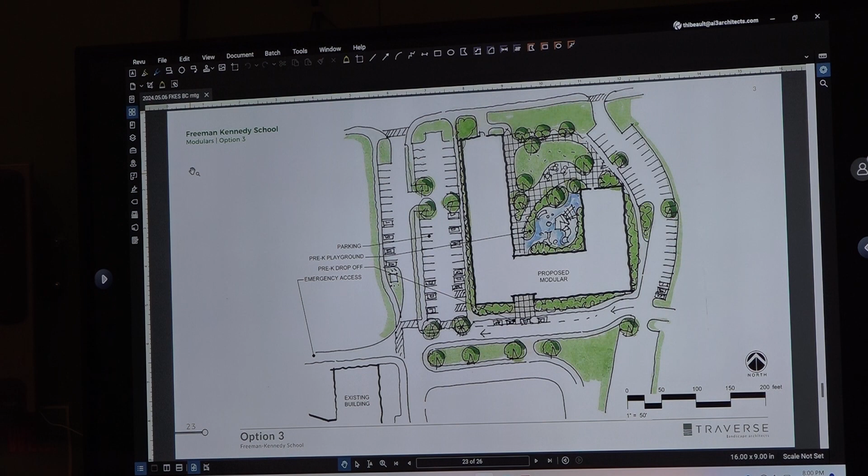But if you move that, if you said, okay kids, your classroom is now here, what would it take to make that into a science lab again? Right, we could put that back, and then we'd have to look at the art room. You said the art room currently is not sufficient, it has ventilation issues with the venting of the kiln.

We could do some moderate work. Let's go back and talk about this. So makerspace, STEAM classroom, and the art room, we could take those 3 spaces and make them traditional classrooms. Those spaces would then have to land within this existing building. I'm thinking that would make more sense, just because then we would put the science lab back, the art room back, the STEAM room back, because I just don't think moving one grade level back and forth for planning would make sense.

24 teachers are here, but everybody's going to walk to the modular for planning? They won't do it. And does every grade use the makerspace? Are third graders using it too? How does that work? They kind of do use that.

And for the makerspace, I imagine it's like one of those little 3D printer things? Engineering, computer, and design lab. Okay, and they use it for AV, green screen, robotics, science - all of that happens there.

And that goes back to the volume, right? Where do you want the optional space? Do you want to put that in an 8.5-foot space, or do you want to put it back into the modular, bring it back into the traditional space?

So with that, for instance, the science lab - we're not going to change the footprint of that. It is what it is. The walls are there. We will just reinstall the amenities to turn it back into a science lab.

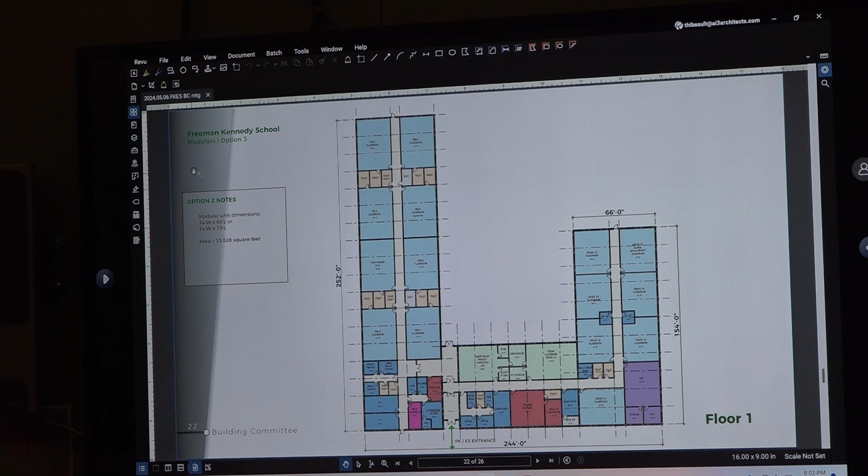But you have the other self-sustaining classrooms, and then the second floor was the classrooms in the maker, in the built-in addition. But one thing that I don't think you mentioned, Justin, in the brick and mortar feasibility design - the pre-K, there is no access into the pre-K classrooms from the building.

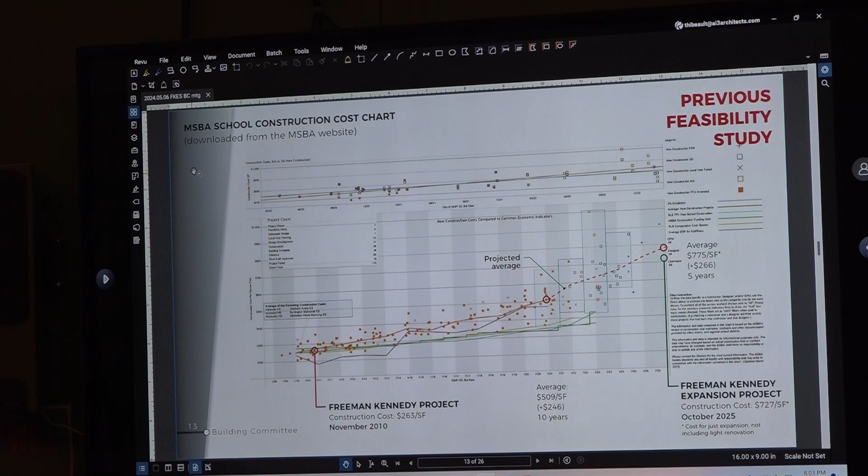So 4th, 5th grade can't go into the preschool hall. The doors are locked with key codes, but the upstairs is connected, so your class could walk through to get to the science lab - it's circular flow, it's a circular building. Yeah, so first floor, you can see a door here - that's controlled access, to avoid any 4th grader from walking into pre-K.

Is that the same for the modular? Second floor, there's no door there. It's free access because it's all the same - it's all the elementary school students.

Modular - and the way it would really lay out is the library is the center here, the makerspace will be the center of the back. But there's no connection, so they would have to go to the first floor, and then it sounded like there was going to be some kind of key card - open the doors, let the kids go, close the doors.

So now here, what we would do, Vicki, is you'd take the makerspace, the art, and the science room back out, and make that all 6th grade - you'd have 9 classrooms. But the 6th graders could go into the preschool, they would have access.

Could we lock it - could we put a door in so the 6th grade couldn't access it? We could put the door - that way at least they'd have access traveling into the stair towers to go up, and then we could key card it so they couldn't go into the first floor main component. So it'd be a similar situation, but they're circulating up.

We would probably put two additional classrooms and a special education classroom there that serves the 6th grade, and then bring those other spaces back into the building. So you would have - I'm not sure if it's 6th grade - but one grade level in a special ed classroom, and then those other places would come back in. That way, at least you'd only have one flow of traffic - the kids would be coming into the building, but we wouldn't be sending teachers and other kids back out.

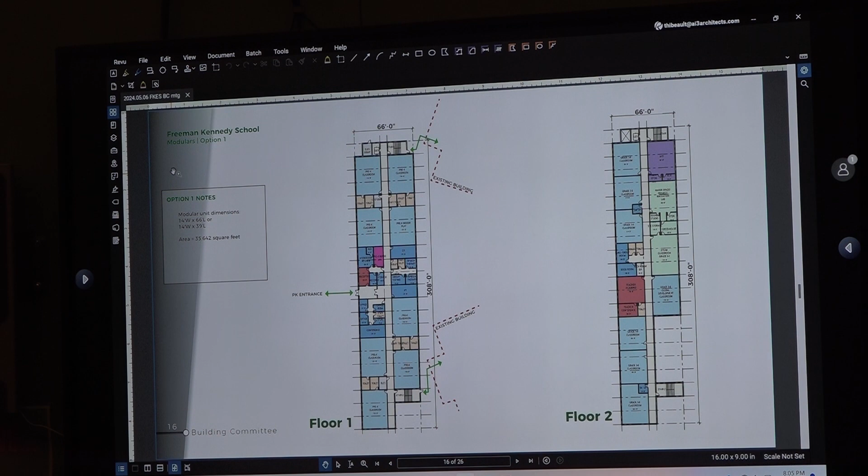And a lot of times teachers' classes come in and they're like, oh, I have to make more copies, I have to print this out. You want them to have easy access.

Hold on everybody, I'll be right back. Let me get my boots on. Golf cart. Yeah, okay.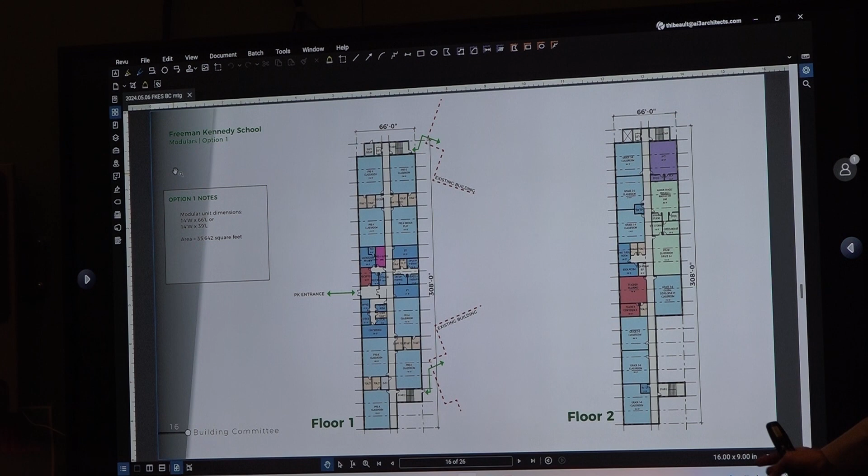So what we can do is go through and update based upon that. Now, it's totally up to this group here. Do you want to meet in two weeks to take a look at them prior to sending it to estimating, or do you want us to make the updates and send it out to estimating? It's totally up to you guys, either way, depending on your comfort level.

Since we're not trying to rush for a town meeting target, I'd kind of like to look at it one more time. I would like to look at it again as well. Grace and Justin can too. I mean, would these be major material cost changes? It sounds like just a modification, a slight design change.

So honestly, a lot of this is the price per square foot. For modular construction, they're going to look at how many modular units there are, how many we're making a middle wall versus a side wall. They're going to look at bathroom counts, the general configuration for mechanical and plumbing systems, runs of piping and stuff. But the material conversation is really at a high level, it's not getting into the nitty gritty.

What does that mean? Like whether it's an art room or a classroom? It's really just seeing a slightly smaller footprint. Yeah, but I'm saying, materially, when we're talking about a $40+ million project, I don't know how much.

So the specialized spaces are slightly more expensive than a general classroom, there are some different treatments within them. Art, for instance, typically based upon the nature of the curriculum, uses epoxy countertops or butcher block countertops versus a laminate countertop. The flooring in those spaces would also be different, not tile or LVT. We would probably recommend a sheet good because there's the possibility of things spilling and you don't want all those seams, so you want it as monolithic as possible.

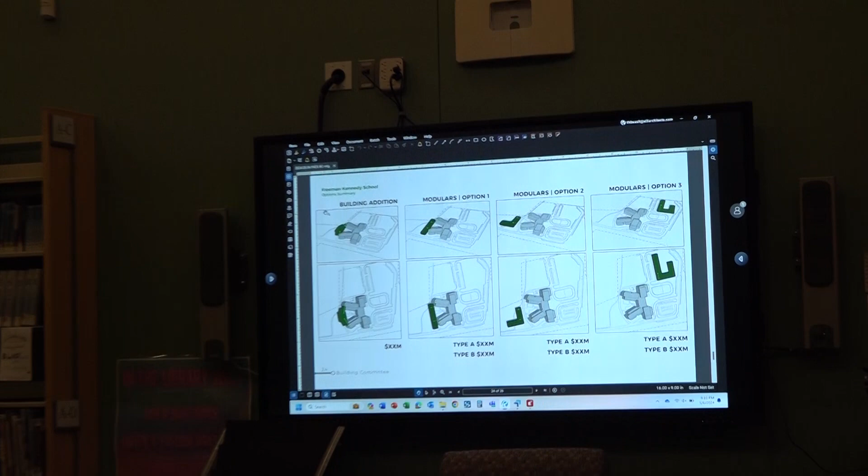That's how it feels to me, and I wonder if it's efficient to even. Well, the only question I had is, one level, would the construction be significantly less expensive than a two-level situation? Oh, that's a fair question. It would be a pricing difference from the actual modulars, but your foundation systems would be more expensive because there's more of them, and the utilities have to be run and dug. With a single story you don't need stairs or an elevator.

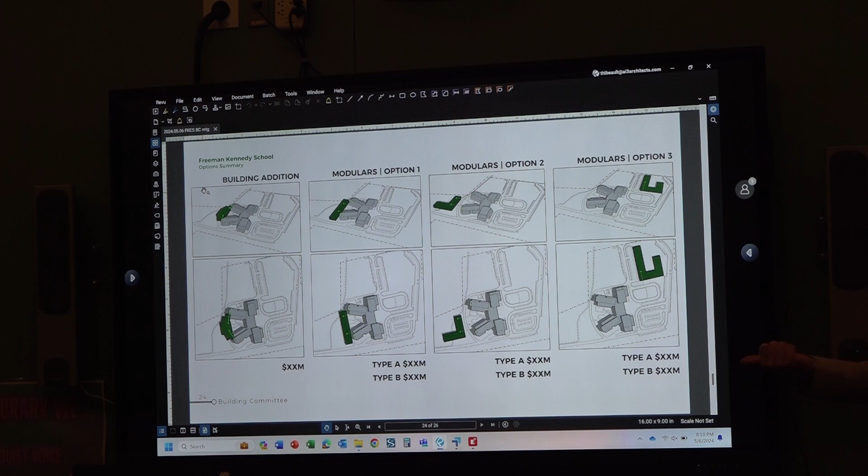So I think it's worth pricing. That's why it's not viable in the mix, I think. Because other than everything else about it not being ideal, the cost is a big factor, I'm guessing. Sure, it's a fair point. It's the least, and not even educationally sound.

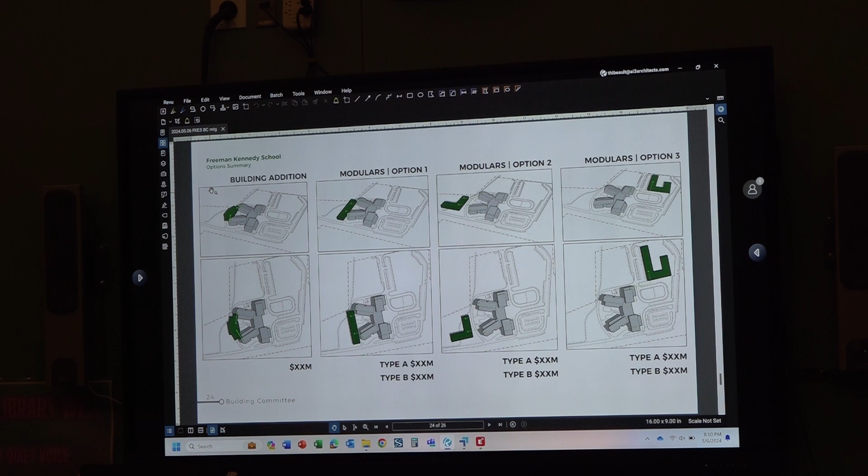For me, I won't have a student that attends the school by the time this finally gets done, so that's not really it. But it's also just from a marketing standpoint to the school community as a solution, and cost is part of that. Yeah, cost, and safety too. You've got kids walking across if that situation opens up. There's cost, there's safety, there's elimination of anything green on school property.

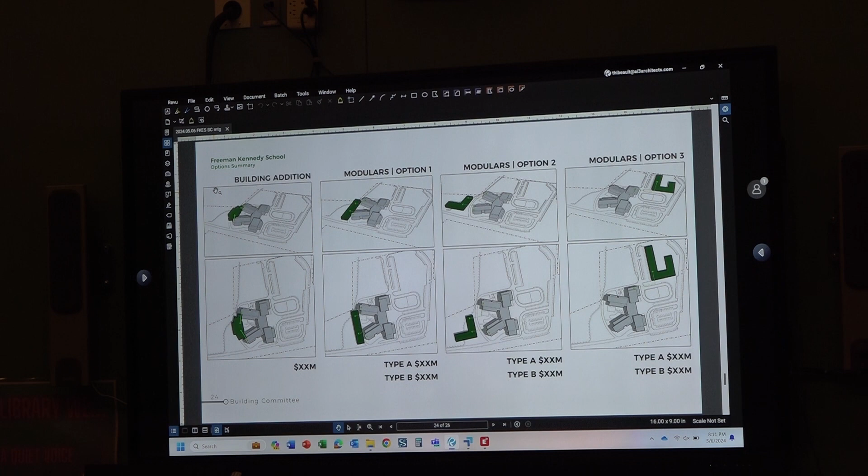I think if the cost is going to be that huge, I don't know if I want to necessarily, I agree. Is it my ideal scenario? No, but what is the cost of getting it estimated in addition to the other two? A couple grand for an estimate, which, when we're talking about a $40 million project, a couple grand is fine.

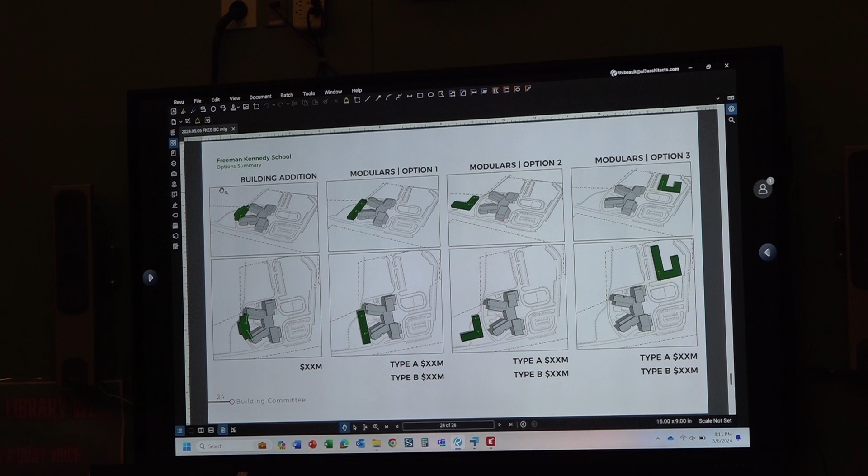I'm not ready to completely eliminate it. Again, if I picked it right now, it's probably not my first choice, but in the matter of due diligence, I already got some flack from people about eliminating the construction trailers, so I want to make sure we show we made the effort. And I think it totally makes sense.

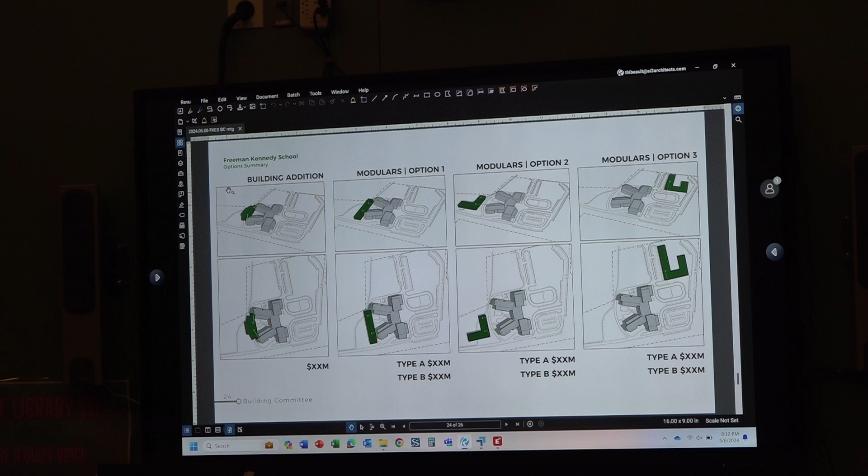I just wanted to add, from what I do, we are also required to meet certain educational minutes. For example, we have to have 120 minutes for English language arts, and a certain amount of minutes for mathematics and science that are state required. So that's a huge consideration when you do any type of educational space. I'm not saying we should or should not look at this option, but it's just something to consider.

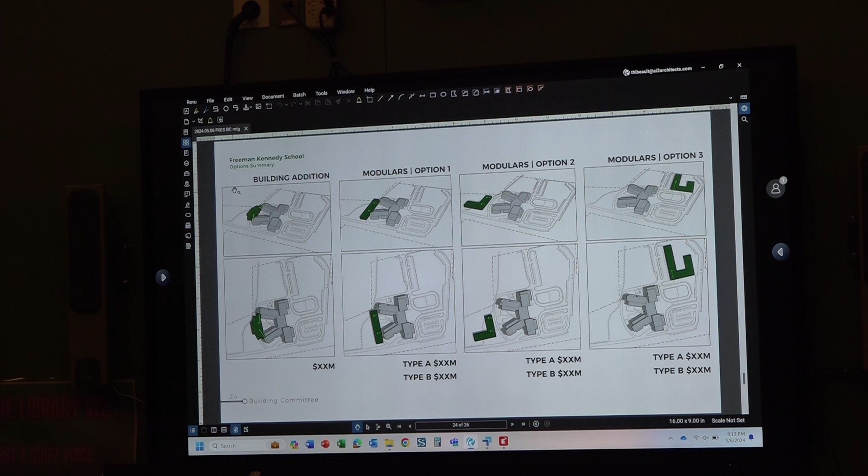I think we're going to have to estimate the instructional impact. I want people who are questioning this to understand it's not as easy as saying the kids can just put on their boots and walk an extra 5 minutes. Our day right now is so compact that we're just meeting what we need to meet to offer the education the state requires. When we start adding excessive travel time, that's something we might not be able to meet. So these are all the things we have to consider - it's not just as easy as them walking a little bit.

But again, let's just say the cost comes in wildly different - then we move to our next phase with the advisory committee. If you say, to make this ideally work it's going to take an extra 15 minutes a week or 10 minutes a day, I imagine you guys could work that out with the teachers union. Actually, you would be amazed.

So, all right, it's either 15 minutes or you're eliminating 2 positions. No, it would have to be negotiated, and it would have an impact on cost. Operationally, year over year, it would drive the cost of education in the town up. So whether you want to pay for it in a debt exclusion or pay for it annually - that's the choice the townspeople will have to make.

I think it's worth pricing all 3, and if there's a dramatic difference, then we look at the next step - what it means for time on learning, safety concerns, all the next considerations. But if they're pretty much equitable in cost, then we say if it's all the same, it's not even in the conversation. But again, the 1 level versus 2 level thing raises a red flag that this might be a big cost situation.

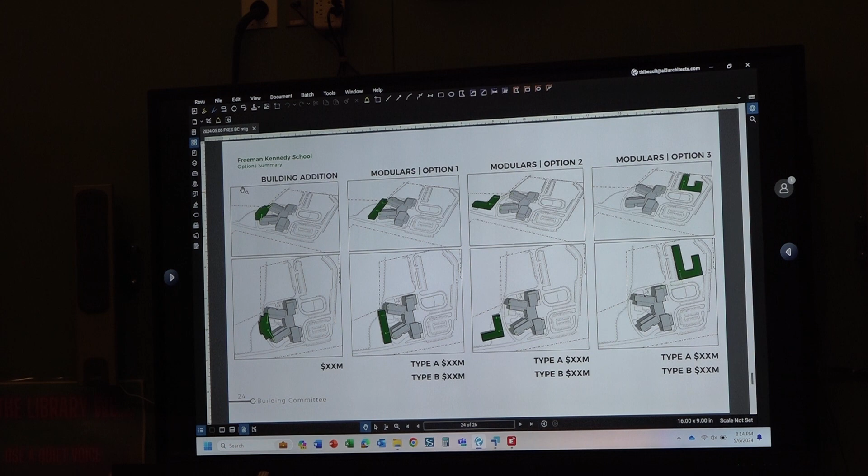I think it's worth pricing all 3 to do due diligence, and then, I think your point, Vicki, is the decision won't just be on cost. We have to look at all the rest. I just wanted to note there's so many things too, and when you get questions I wanted to say that. I just don't want to bulldoze past something and then have people say, why didn't you even consider that? I think it's in our best interest to look and then get to the next step.

So I heard teachers union and teachers contract - if there's a significant impact to the day, will the teachers union have to approve? We can't change the negotiated contract, so we cannot change the hours of the school day. That's my point - we can't change the hours of the day, so that's another way some of these will work their way out, because that'll be a limiting factor regardless of cost.

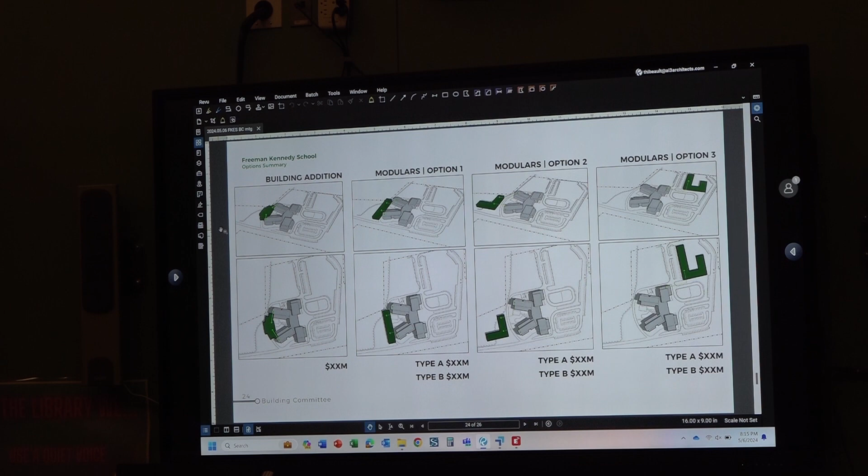We'll have to look at it - we're not scheduled, I mean you could request to go into negotiations to reopen the contract, but here's the thing, they don't have to. How long do those contracts last? We have a 3-year contract. So will this be done by then? That's what I'm saying - you're basically walking into the new window by the time this place is operational anyway. But it still adds another - it's a successor contract, and you have to negotiate a change, and time has a cost.

But I think we're getting ahead of ourselves - let's even see where these come in. Well, yeah, that's the value to that. Okay, no, that makes sense.

So we will update based upon that feedback. We targeted - perfect segue - next meeting we targeted, we can just confirm that it's approved with everybody here, still May 20th.

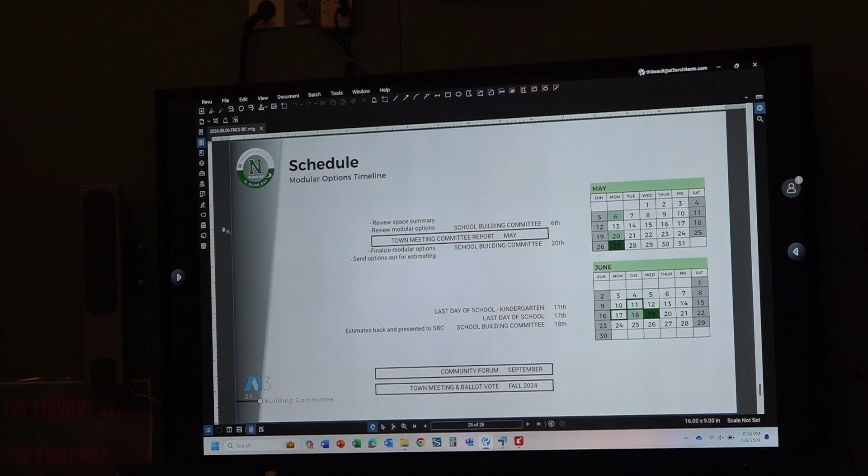Show updated floor plans. Perfect. If we're good to go, then we'll send them out for estimating. If not, we'll revise.

Sounds great. Is that one already calendared? I don't think we've sent the invite out yet. We just discussed the tentative dates at the last meeting, so I'll have Adrian send it to everybody tomorrow.

Two quick other agenda items for tonight. We have town meeting coming up next Wednesday, and committees are allowed time to give an update on the progress of the committee work. So we did ask the moderator for some time for our chair and vice chair to update the community on the status of our work, which would basically be to say that we are in the process of looking at modular solutions.

Well, the good news is we won't be the big agenda item on the menu, so you might be able to fly under the radar. Well, I'd rather not, honestly. Transparency-wise, we really want people to know we redid the demographic study. The results are very similar.

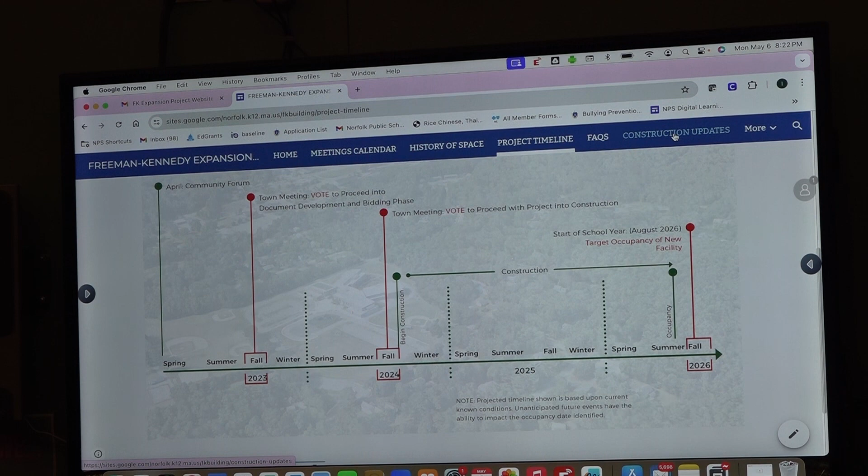We thought it might be helpful to put some FAQs, quick questions that people are asking, and things you're hearing from people. A lot of districts that have this, once building construction starts, keep the same page and have a place for construction updates, photos of construction and things happening. There's also how to contact, with the building committee members' names and information.

So we're going to continue working on this. I'm going to send you guys the link so you can play around and see what's on there. At the next meeting you could think of any other information you think would be useful. We'll put up the Flansburgh study done in 2019, just so everybody can see the full history in one place. Maybe we could all come with an FAQ.

What was that? Maybe we could all come with an FAQ. I certainly have a lot of FAQs. Yeah, if there's questions you're getting, I'll write those down. I kind of envisioned that being just a narrative, responses to commonly asked questions.

What we were hoping to do is have this complete and ready to launch by the end of May, so as we go forward we'll just build on it. When we get into the fall and we're talking about options, people will be able to access the full history in one place. Yeah, this is great. I think Adrian's great at this stuff, she did a really nice job.

So I will share the link, you can take a look. When we come next time, maybe we can brainstorm any additional things that should be included. Justin, you might have ideas of things you've seen in other towns. I'll come up with a couple of FAQs. That would be great. And then we'll have it ready.

What we can also do is put up a picture with a barcode at Town Hall, and people can scan it while they're waiting if they want more information, and get that out to public places. Sound good? Yes, the more information, the better.